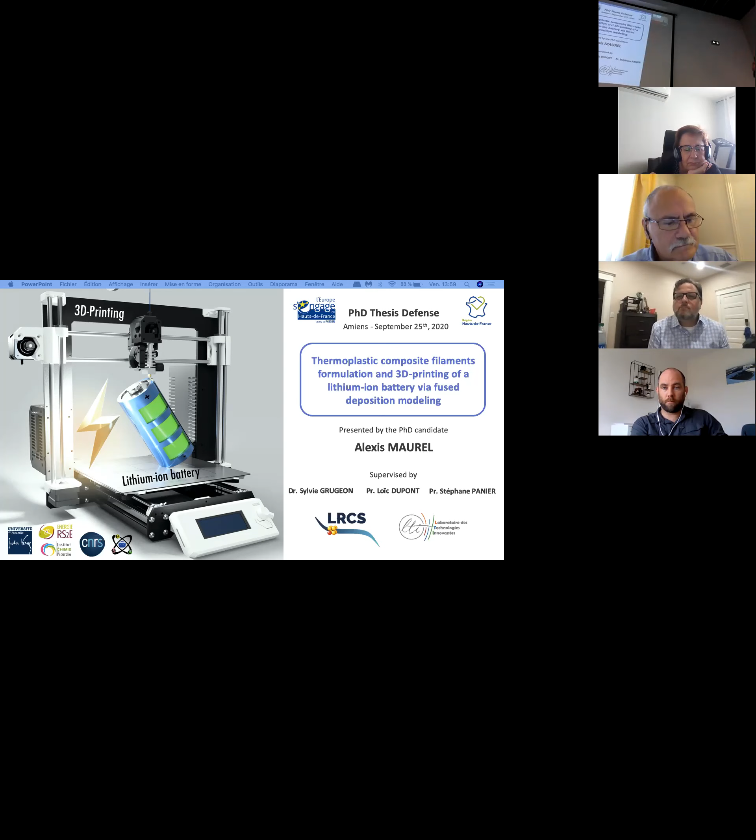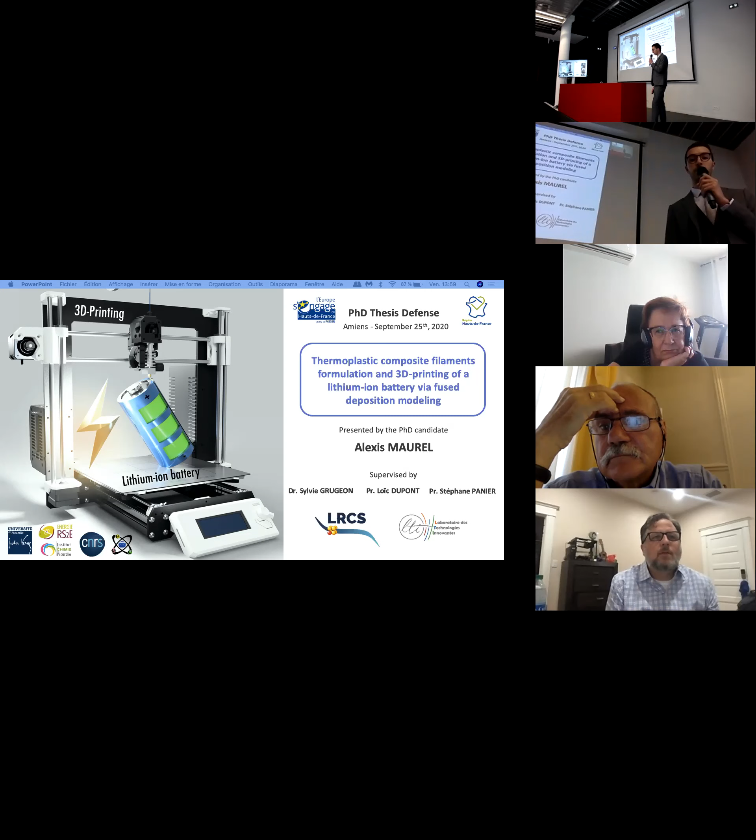Thank you very much. Good afternoon, everyone. It's a great honor for me to be here today to defend this PhD thesis. Today my talk is entitled 'Thermoplastic composite filaments formulation and 3D-printing of a lithium-ion battery via fused deposition modeling.' This PhD thesis was funded by FEDER and the region Hauts-de-France, and supervised by Sylvie Grugeon, Loïc Dupont from the Laboratoire Réactivité et Chimie des Solides, and Stéphane Panier from the Laboratoire des Technologies Innovantes.

Today's presentation is divided into 5 parts. First, after a brief reminder about the context of this thesis, I will go into more detail regarding the composite filament formulation as well as 3D printing of a complete lithium-ion battery. These two parts will focus only on liquid electrolyte technology. The 4th part will be about moving towards solid state technology for a lithium-ion battery. Then finally, I will conclude and give some perspectives.

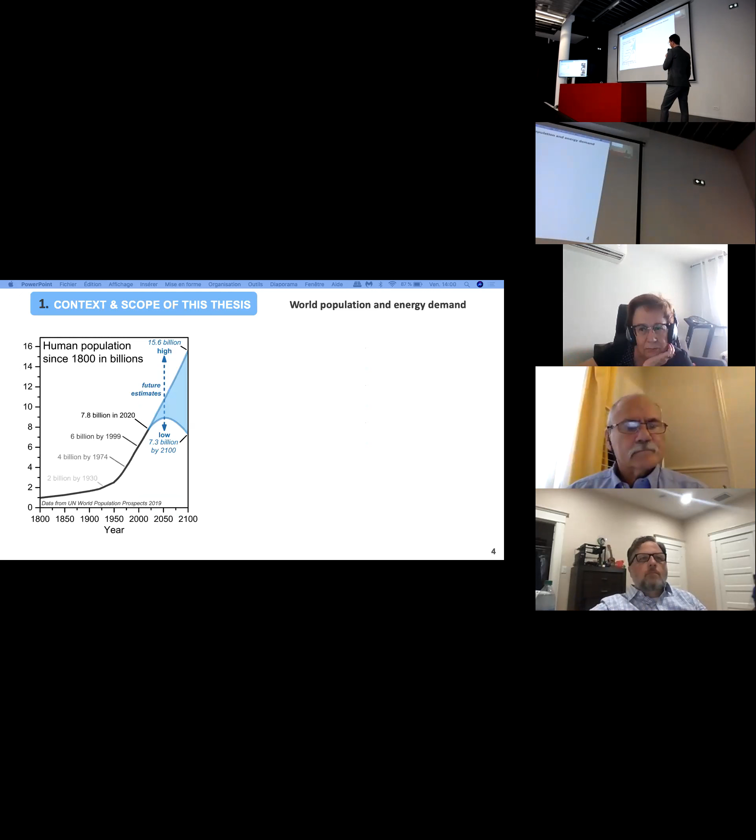First, about the background of this PhD thesis. Nowadays, in 2020, we are 7.8 billion people, and by the end of the century, as you can see here, this is going to stay the same or increase a lot. In parallel, if we look at world energy demand, you can see that the trend is increasing as well.

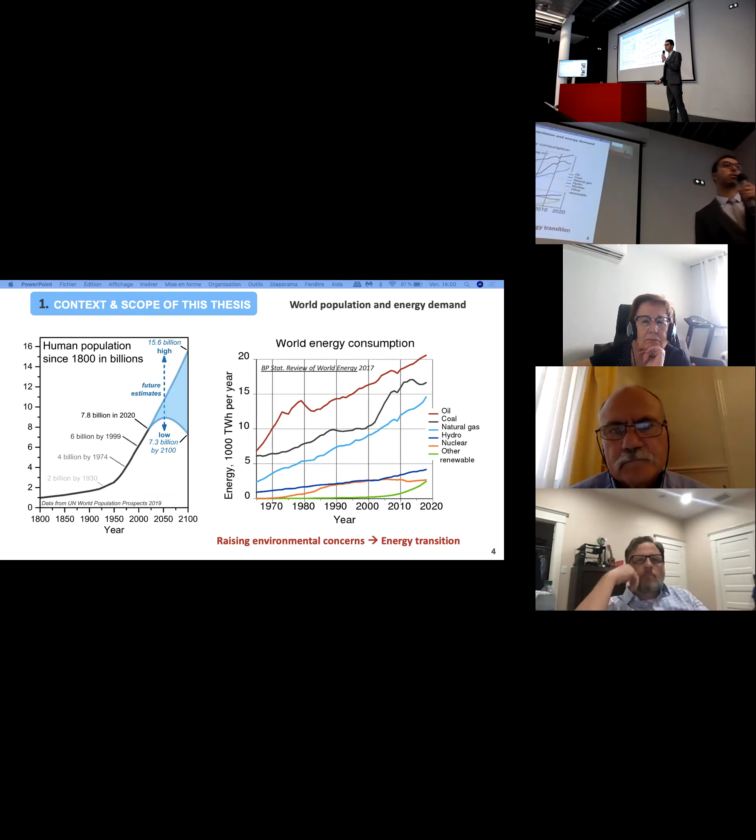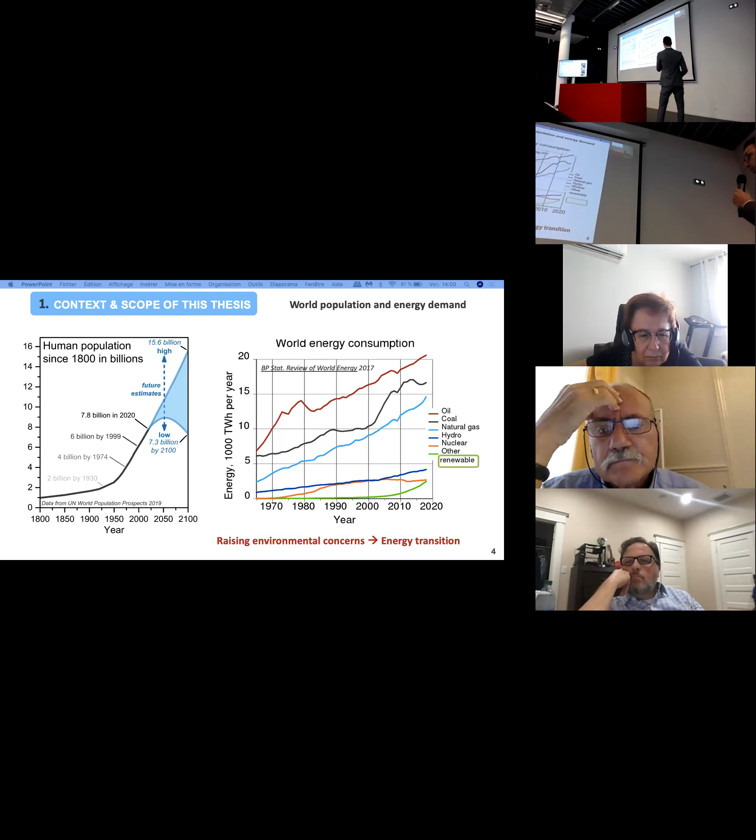During the last decades, we heard a lot in the news about rising environmental concerns due to fossil fuel energy sources. In recent decades, some governments tried to put new regulations in place to implement energy transition. Here you can see in the graphs that since 2000, the share of renewable energy sources has been increasing steadily.

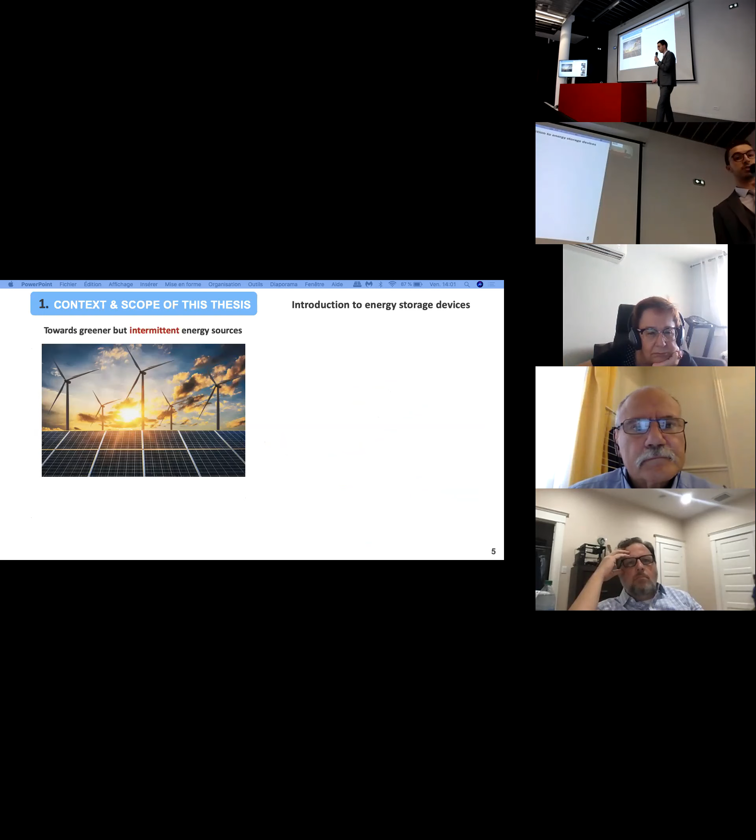The main issue with renewable energy sources such as photovoltaic or wind turbines is that both are intermittent energy sources. So energy storage devices are mandatory in parallel.

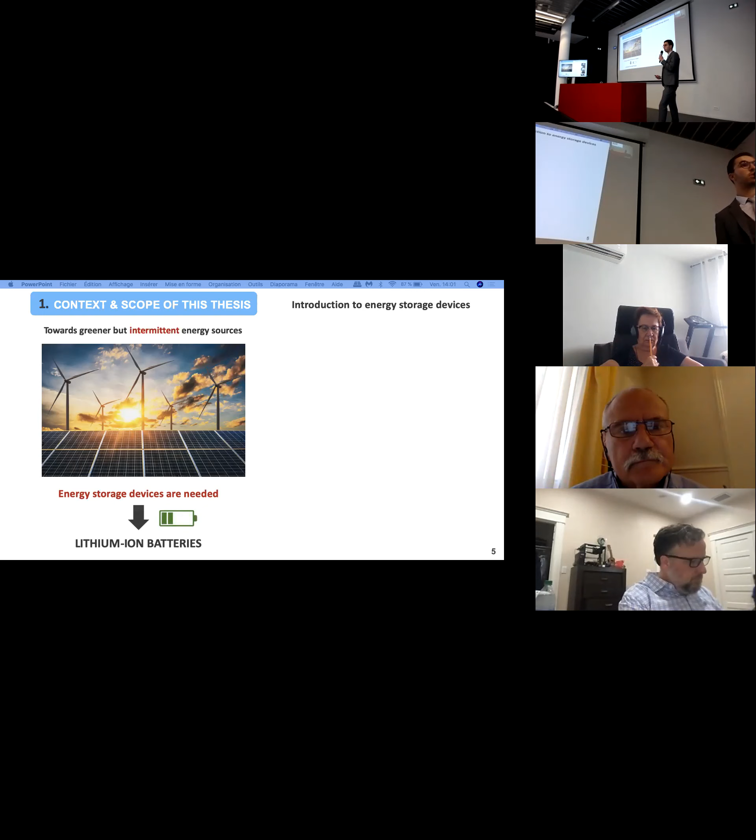Among these energy storage devices, lithium-ion batteries are widely used nowadays due to their good cyclability, long cycle life, as well as good energy density and power. These devices are now used in so many applications such as electronics, home appliances, and transport, that the entire field was rewarded last year when the Nobel Prize in Chemistry was awarded.

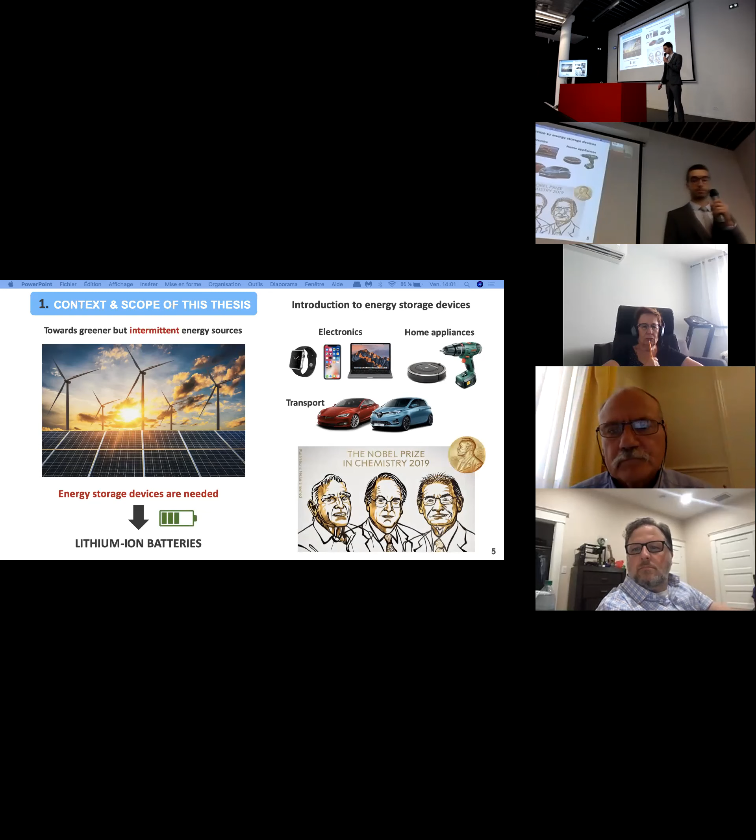If you look at a commercial lithium-ion battery, you will see it's based on liquid electrolyte technology, with different components: a positive electrode, a negative electrode, both separated by an electronically insulating separator membrane.

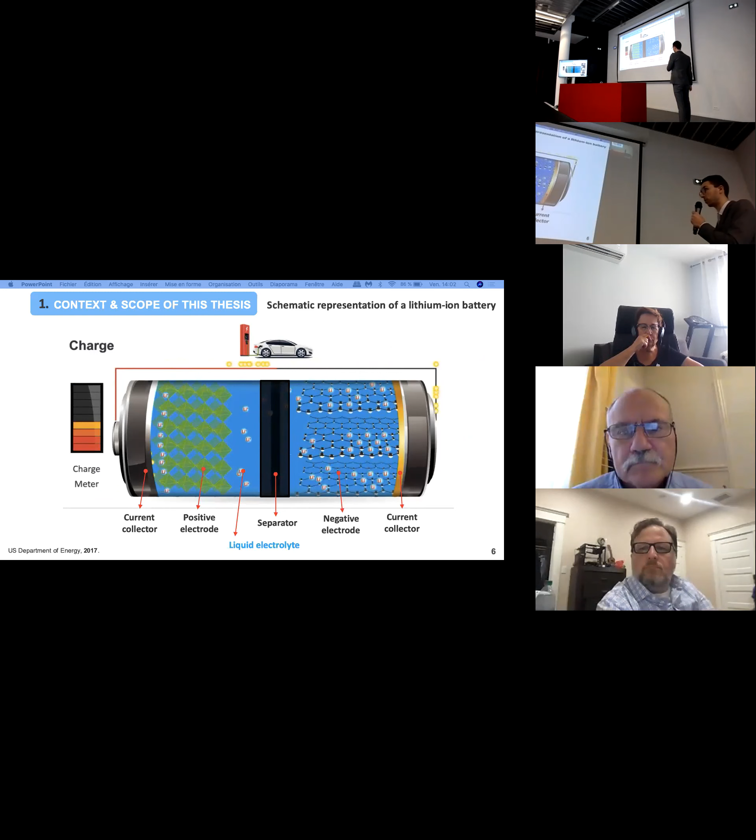During charge, the lithium ions move from the positive electrode towards the negative one, while the electrons move through the external circuit. During discharge, the exact reverse phenomenon takes place.

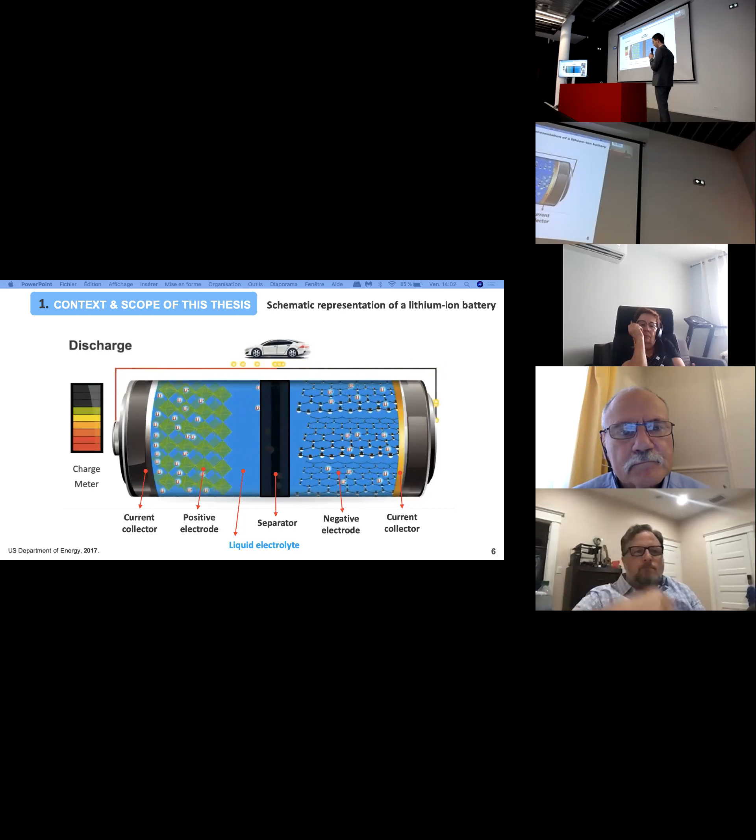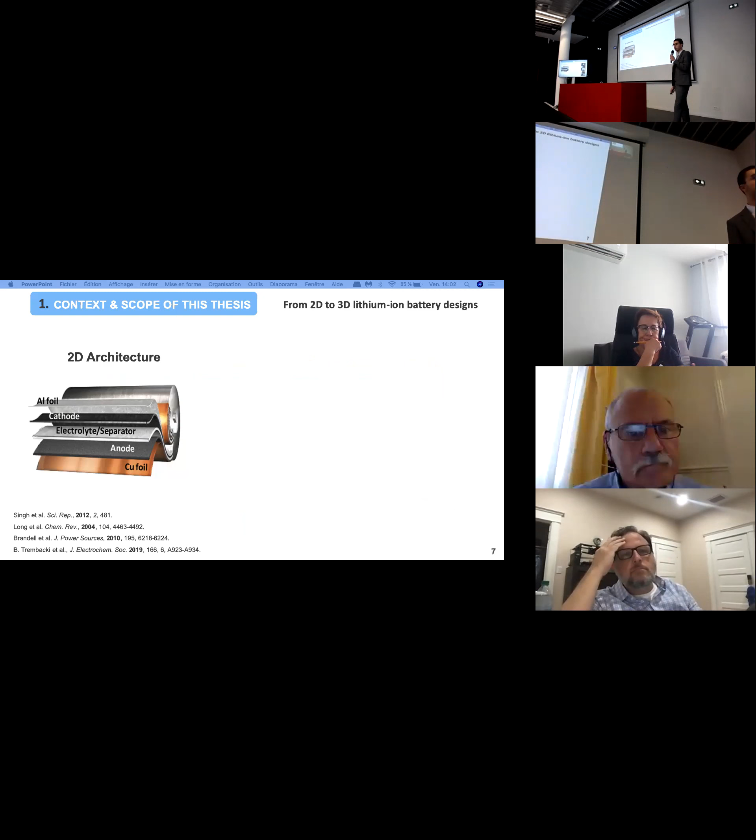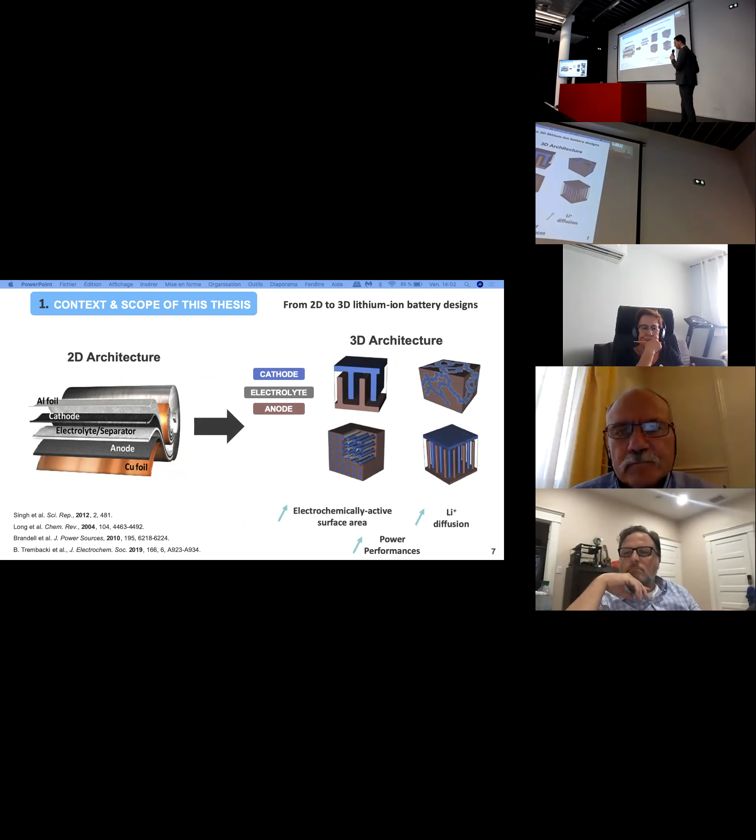It was reported in literature in the past that if you move from a two-dimensional architecture of the battery toward a three-dimensional architecture, you can improve considerably the power performances. This is due to the increased electrochemically active surface area, and also the lithium-ion diffusion is greatly improved thanks to this kind of architecture.

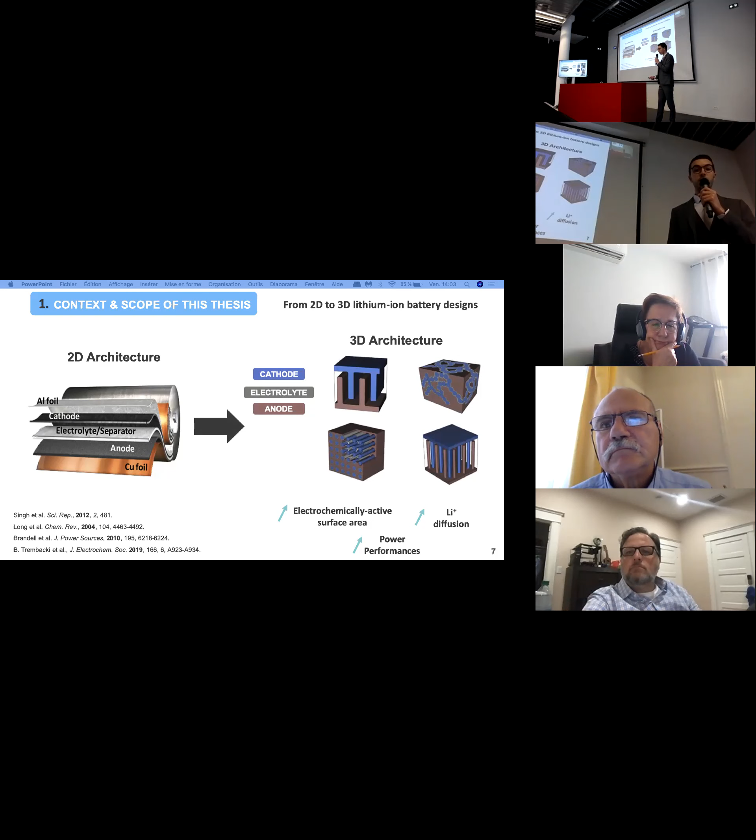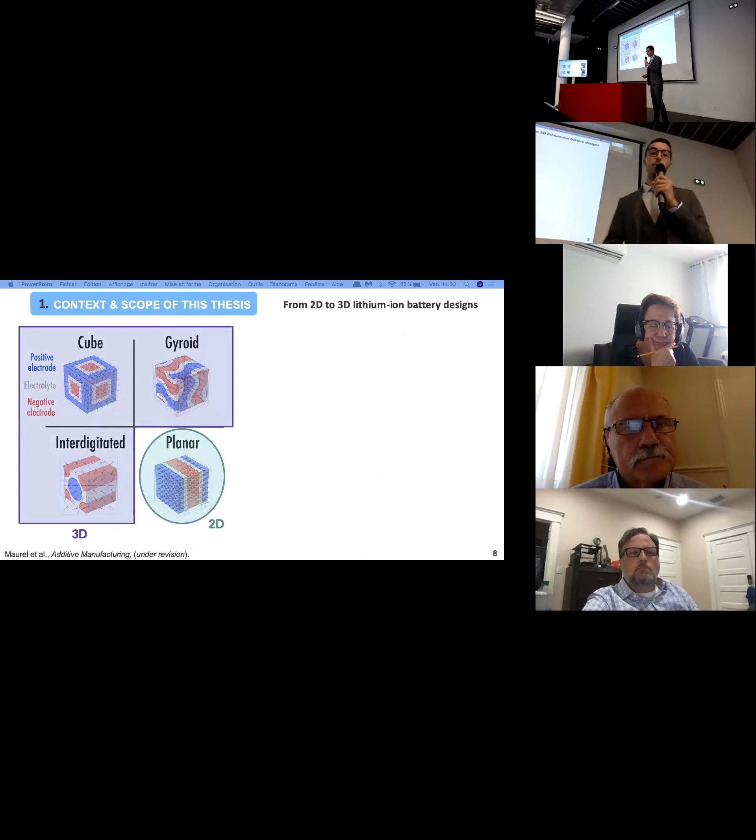This trend was confirmed during this PhD thesis. We did a modeling study here, comparing some two-dimensional architectures of the battery with three-dimensional architectures. Based on the results I'm going to show today, first of all, we saw the following.

You can see the lithium-ion diffusion path. In a planar two-dimensional electrode battery system, the lithium-ions are just moving in one dimension between the electrodes, doing a simple shuttle. While in three-dimensional architectures of the battery, such as the gyroid here, you can clearly see the lithium-ions move towards the whole space in three dimensions.

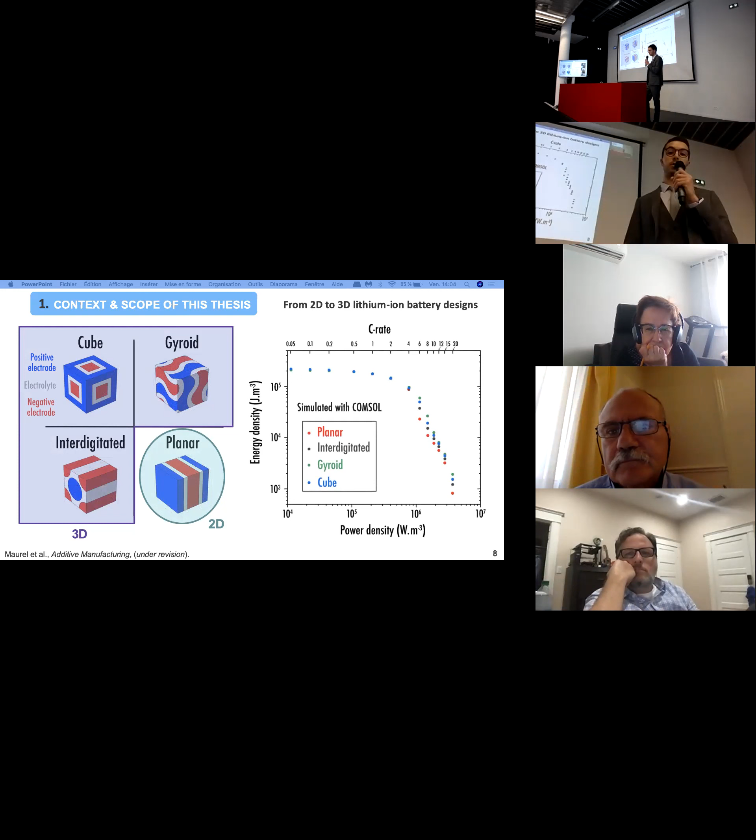Based on the results I'm presenting today from the thesis, we were able to model and simulate a Ragone plot, so energy density versus power density. Here, at high current density, for power applications, we were able to demonstrate that we have better performances for three-dimensional architectures compared to 2D ones.

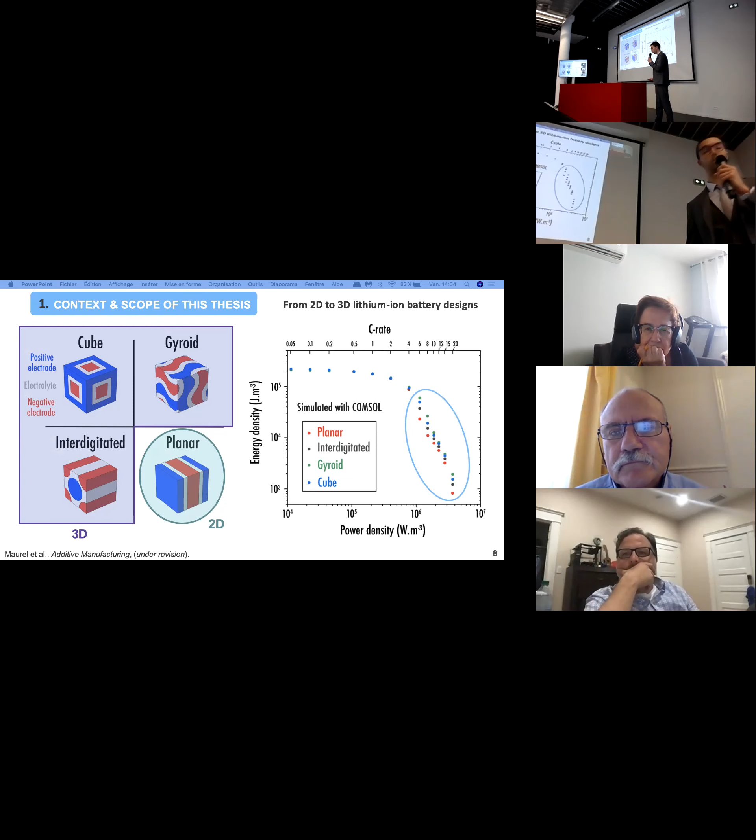Two-dimensional architectures are classical, but in order to reach three-dimensional architectures of lithium-ion batteries, such as the gyroid, these geometries are so innovative that you can only obtain them with very innovative technology, such as 3D printing.

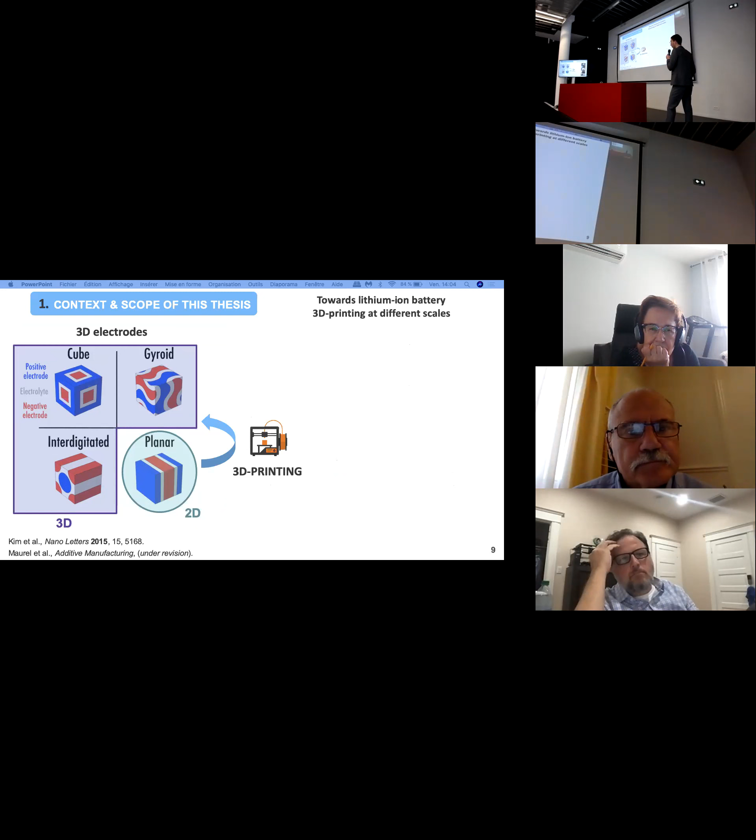There is another advantage of 3D printing: you can implement the battery into the object itself. Here is an example from literature by Kim et al., who used connected glasses. In commercial connected glasses, the lithium-ion battery is a huge block on one side of the frame. Thanks to 3D printing, we could imagine hiding this battery within the frame of the object, so the battery becomes the object.

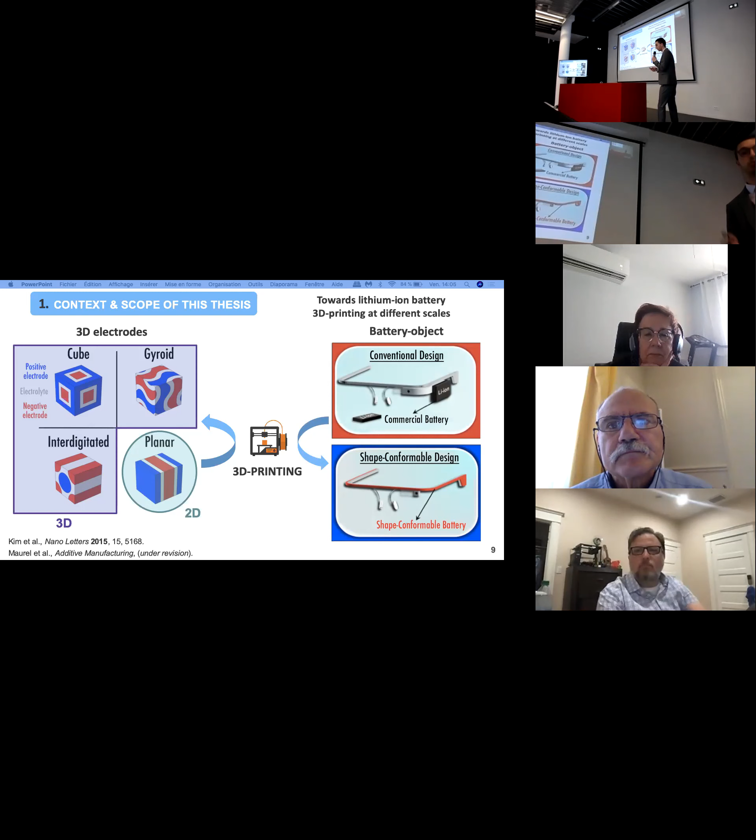But what is 3D printing? We also call it, scientifically speaking, additive manufacturing. It consists of consecutive layers of materials that are deposited on top of each other.

First, you need to draw the object you want to print using computer design software, and you obtain what we call an STL file, which consists of a mesh of dots, a mesh of triangles. Then this file is sent to a second software called a slicer, where you divide your object into horizontal slices. This is what we call a G-code file.

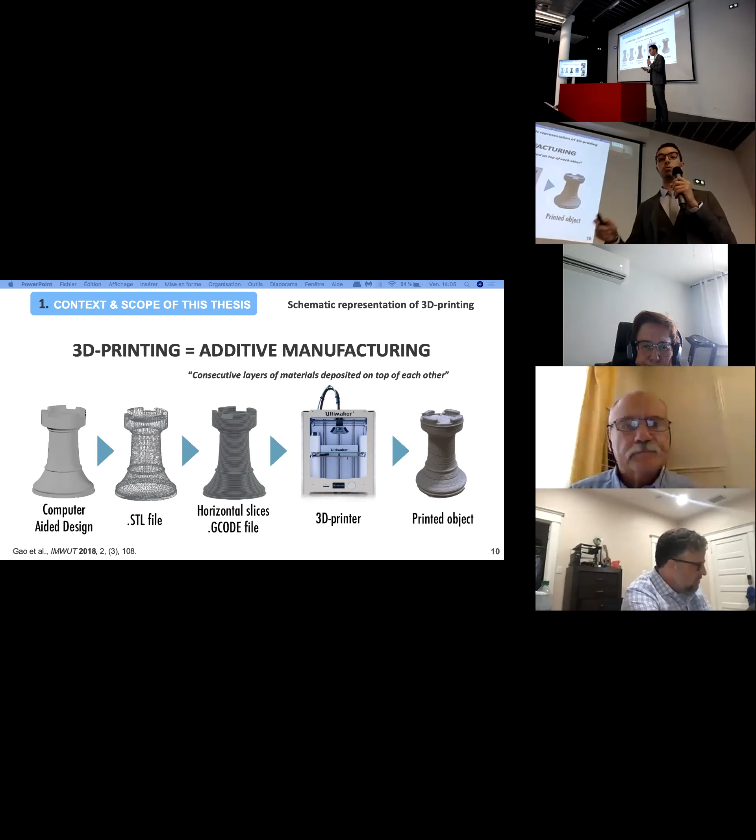Within this G-code file, you also implement printing parameters such as printing temperature, printing speed, etc. You send this G-code file to the 3D printer, and by pressing the play button, you're able to print your final object layer upon layer.

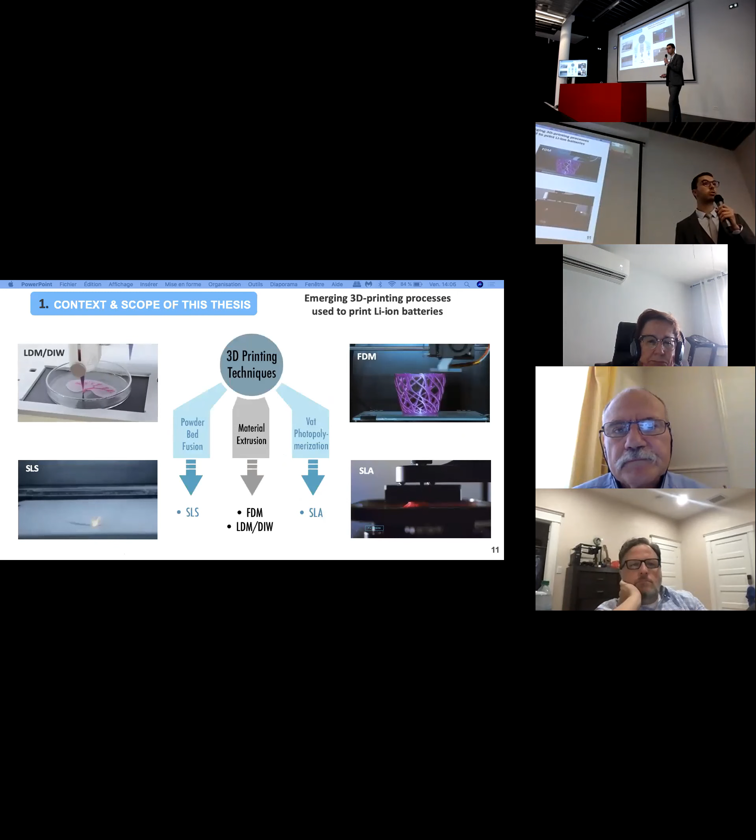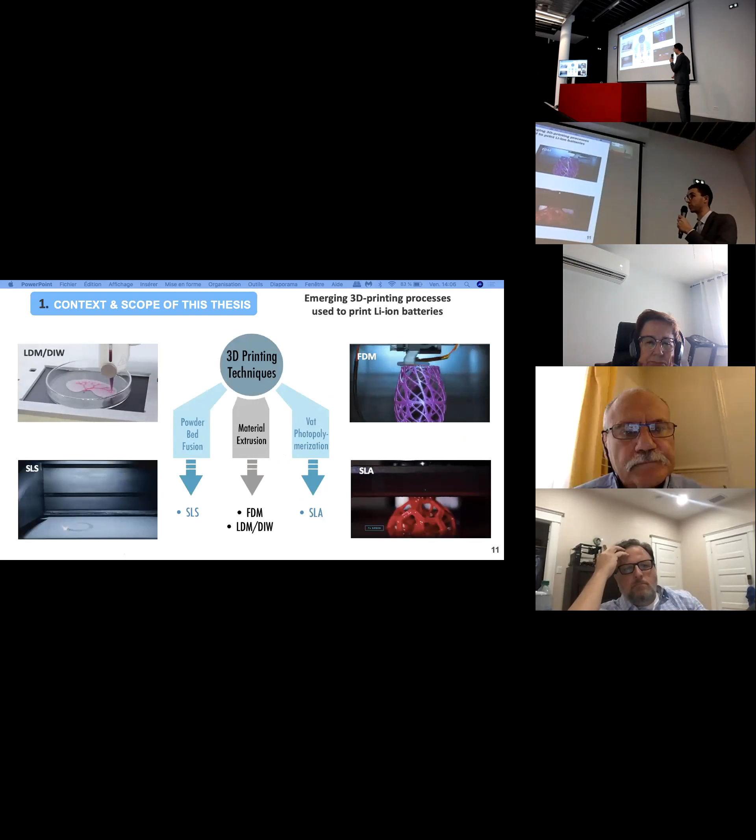Nowadays, the emerging 3D printing techniques used to print lithium-ion batteries are the following: liquid deposition modeling, also called direct ink writing, top left video; selective laser sintering, which uses powder; on top right, FDM, fused deposition modeling; and also stereolithography apparatus.

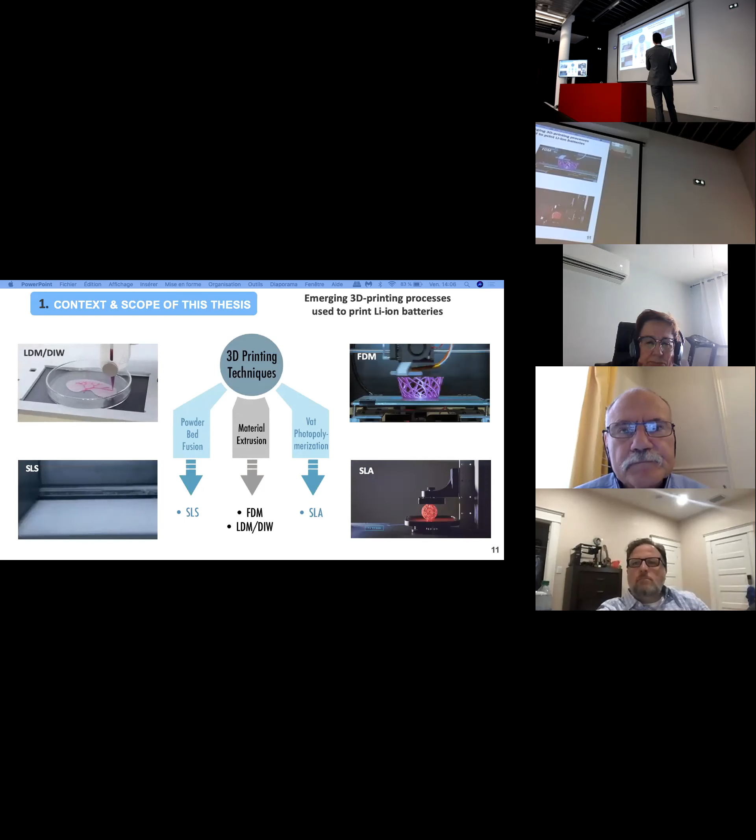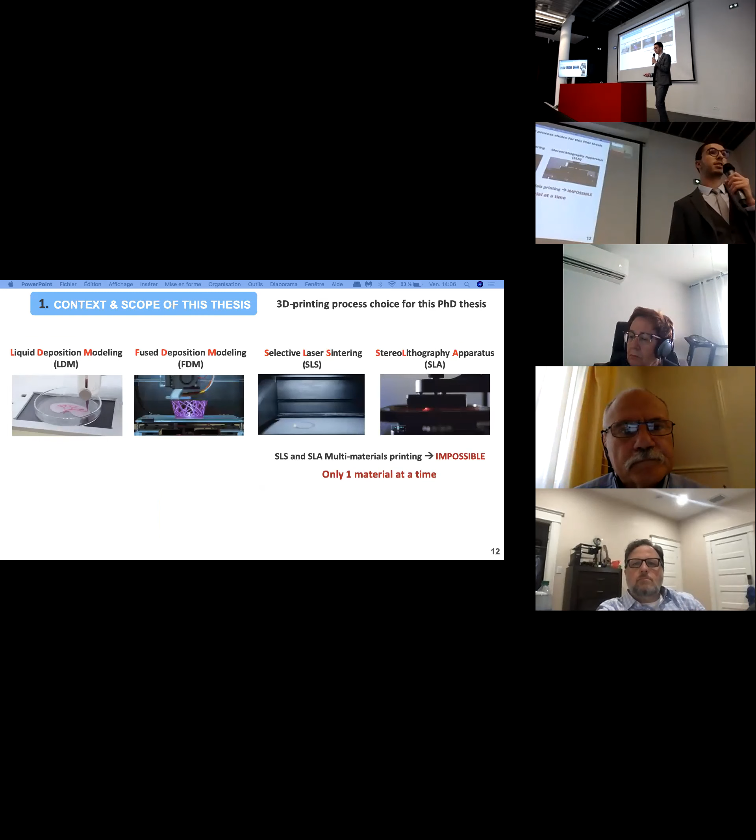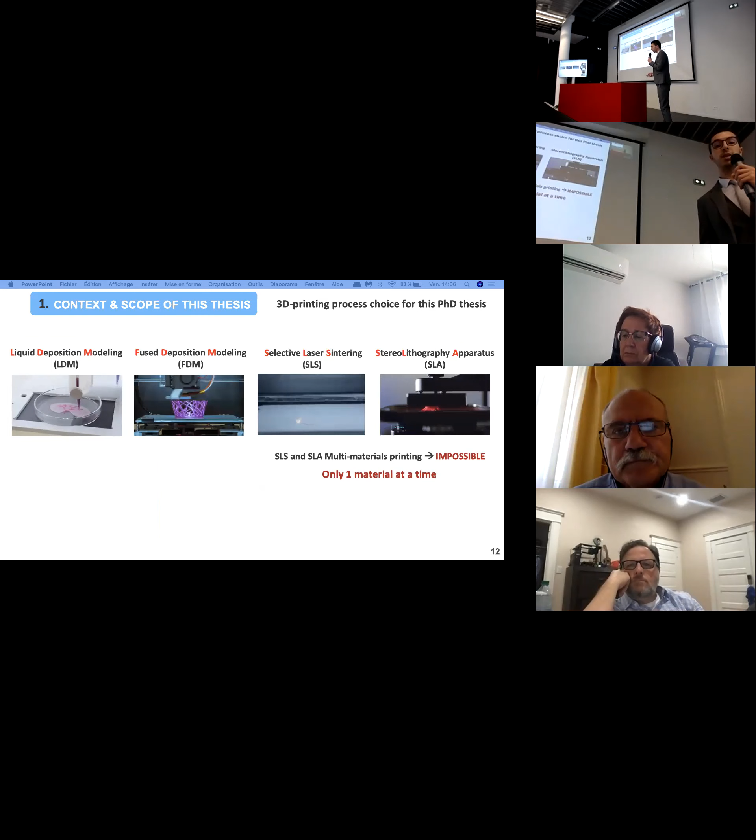Among these four techniques, the first step of this PhD thesis was to make the right choice, which process we were going to use to print lithium-ion batteries. Right from the beginning, we decided to exclude selective laser sintering and stereolithography apparatus, as with both techniques, unfortunately, you cannot print multi-material objects, meaning you can only print one material at a time.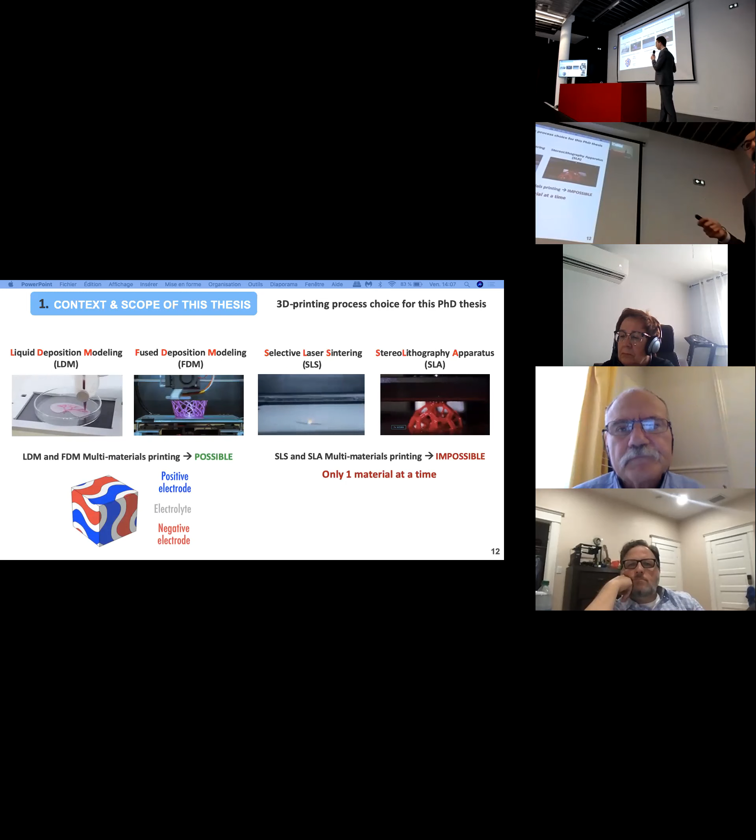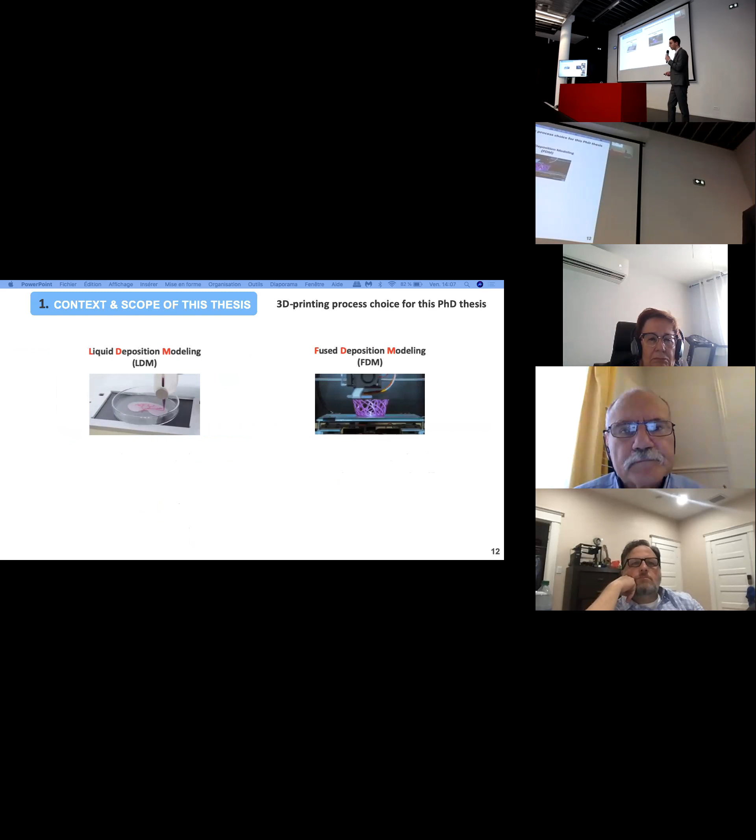So with both techniques, you cannot imagine printing such gyroid architecture for the lithium-ion battery, while with liquid deposition modeling and fused deposition modeling, you can, since multi-material printing options exist. So among these two techniques, LDM and FDM, we needed again to make a choice, and we took a look at the advantages and drawbacks of each technique.

So we decided to focus this PhD thesis on fused deposition modeling. Here you don't have that limitation and you don't have any post-processing. But you have another drawback: a filament formulation that is mandatory.

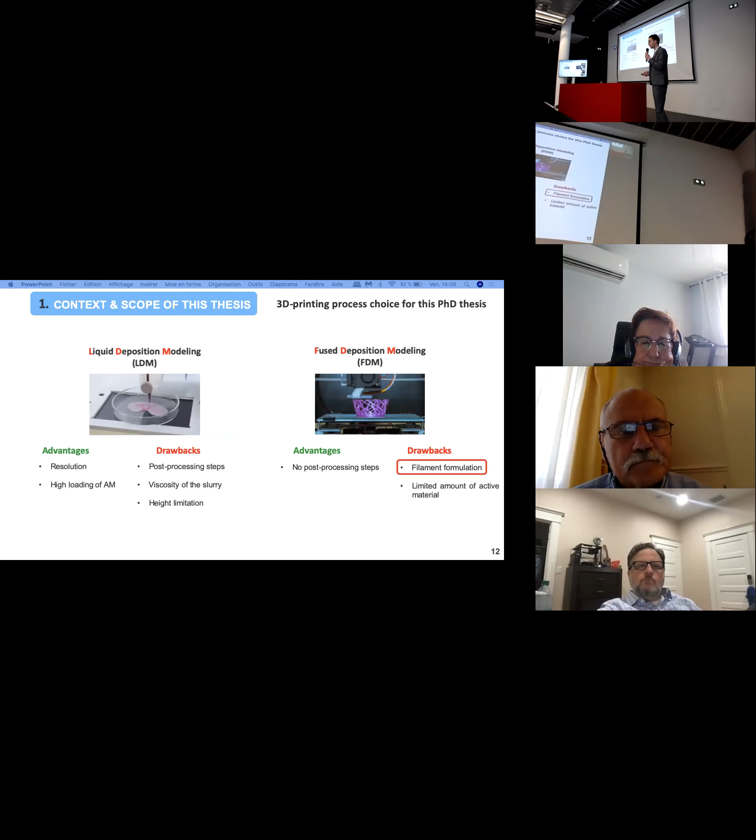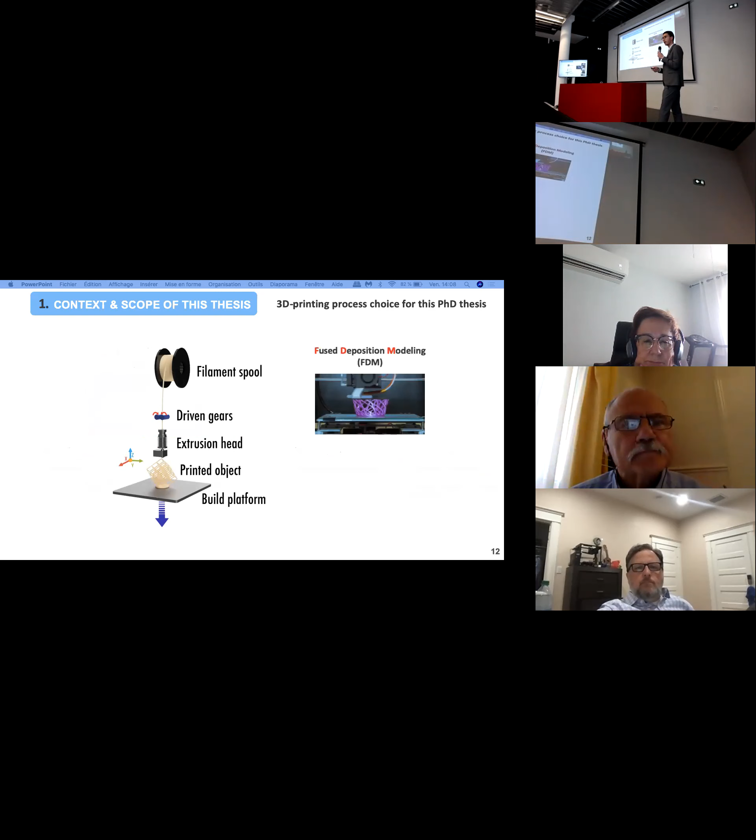If you take a look at the process itself, it uses thermoplastic filaments as the material source for the 3D printer. This filament is introduced within a heated nozzle, and by displacement of this nozzle into the three axes, X, Y, and Z, you are able to print wall objects layer after layer.

So these are the challenges we needed to address during this PhD thesis. The first part was focused mainly on composite filament formulation, corresponding to each component of a classical lithium-ion battery using liquid electrolytes.

In order to confer mechanical strength to the filaments, we decided to use polylactic acid, PLA, as polymer matrix. Why PLA? First, because it's a green polymer made from corn. Also, PLA is the most used polymer for FDM applications.

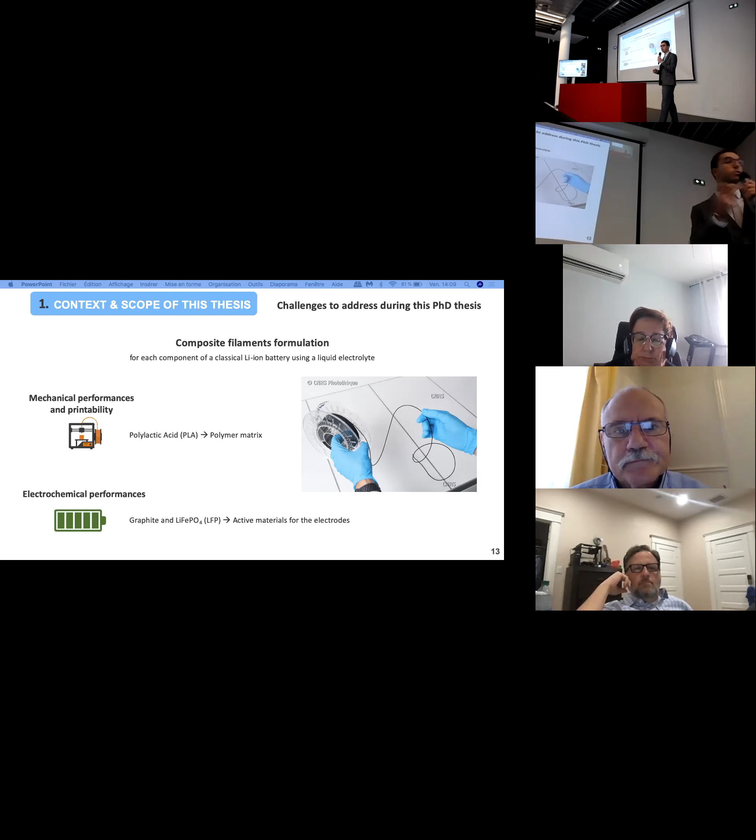Concerning electrochemical performance, we decided to choose classical active materials such as graphite and lithium iron phosphate as active material for, respectively, the negative and the positive electrodes.

Of course, it was a huge compromise between mechanical performance on one side and electrochemical performance on the other. If you have a filament with too high a loading of active material, you will clearly have printability issues. On the contrary, if you don't have enough active material within your filament, what you print will show poor electrochemical performance. So that was really a huge compromise.

Finally, once you develop these filaments, the main goal of this PhD thesis was to print the complete lithium-ion battery in one single step. That was the main goal.

So we started first with the composite filament formulation. First, we established an elaboration process. We decided to use a solvent to combine both the polymer matrix and the active materials. That was not ideal, but at least it was easy - more easy to have homogeneous samples at the laboratory scale.

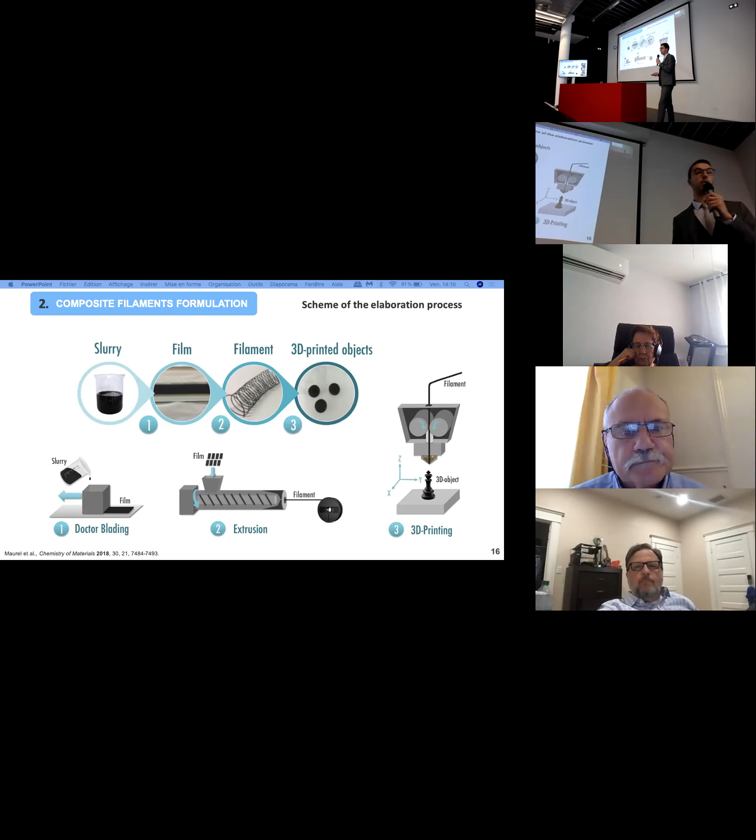After we have a homogeneous slurry, we perform tape casting, and after evaporation of the solvent, we obtain a classic film. This film is divided and cut into tiny pieces and used as a material source to feed the extruder. With this extruder, after extrusion, we obtain classical 1.75 millimeter filaments.

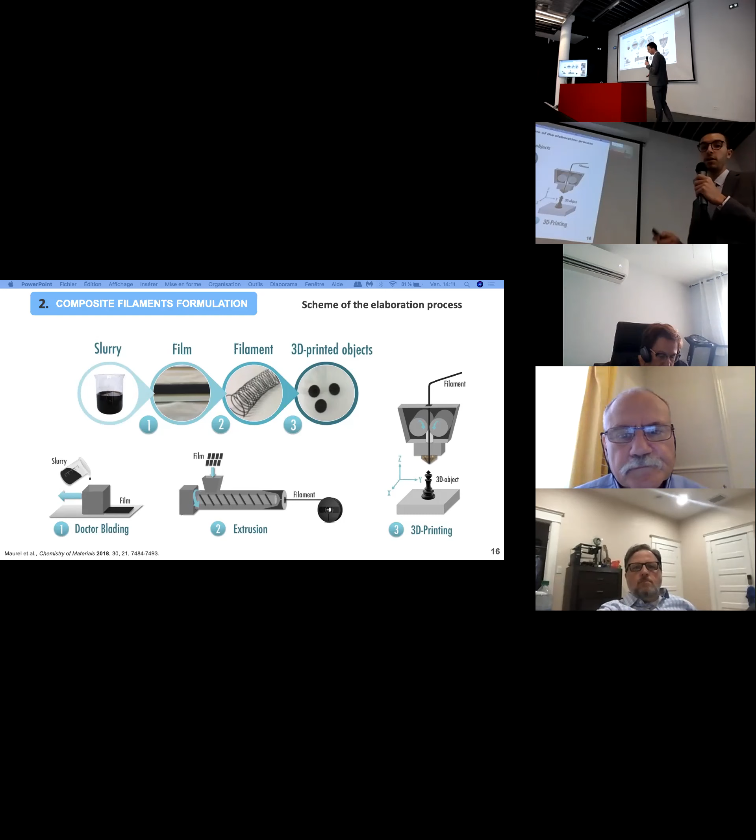This filament, finally, is used as material source for the 3D printer in order to print many objects, such as these 3D printed discs.

I would like to remind you that at the beginning of this thesis, we focused on filament formulation regarding liquid electrolyte technology. And first, we started by developing the filament for the negative electrode. Before starting to develop this filament, we took a look at what was available on the market.

We found a commercial filament that had 8% graphene and 92% PLA. Unfortunately, right from the beginning, we were thinking that 8% graphene would be maybe too low an amount of active material to confer good electrochemical performance. So instead of using this filament, we decided to create our own.

With this filament, we tried to load a huge amount of active material. As you can see, we tried to load up to 70% in weight percentage of graphite and only 30% PLA. Of course, the goal was to maximize the electrochemical performance while maintaining just enough mechanical strength to allow printability.

So here, that was a huge amount of active material we tried to implement. Let's focus on this main filament that we try to do. First step, of course, slurry.

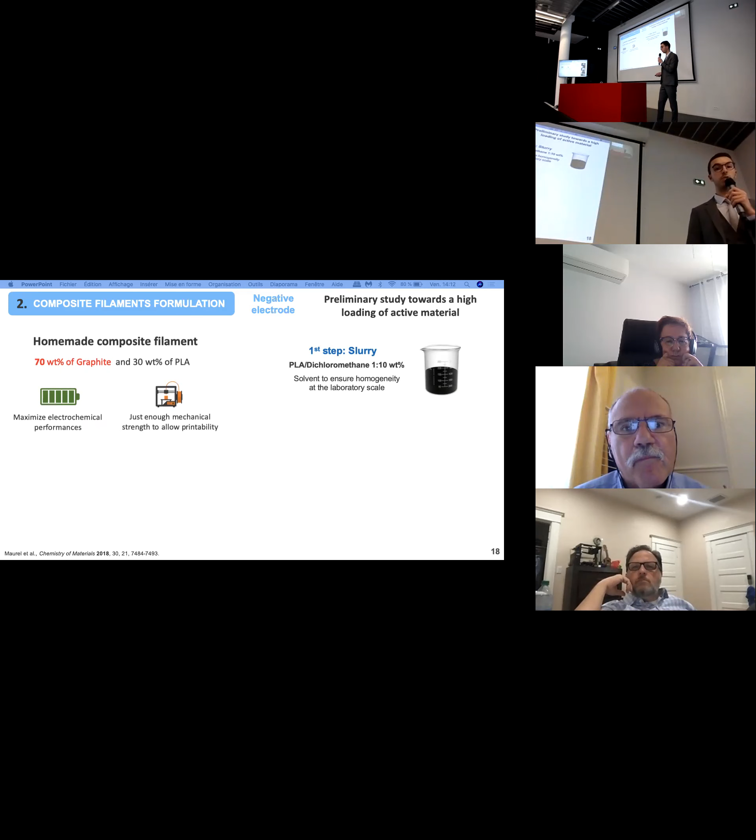We combine polymer matrix and graphite here in solvent. Here we use dichloromethane. Then we obtain a film, and this film we cut into tiny pieces in order to feed an extruder. Unfortunately, the resulting filaments, as you can see, were not printable at all.

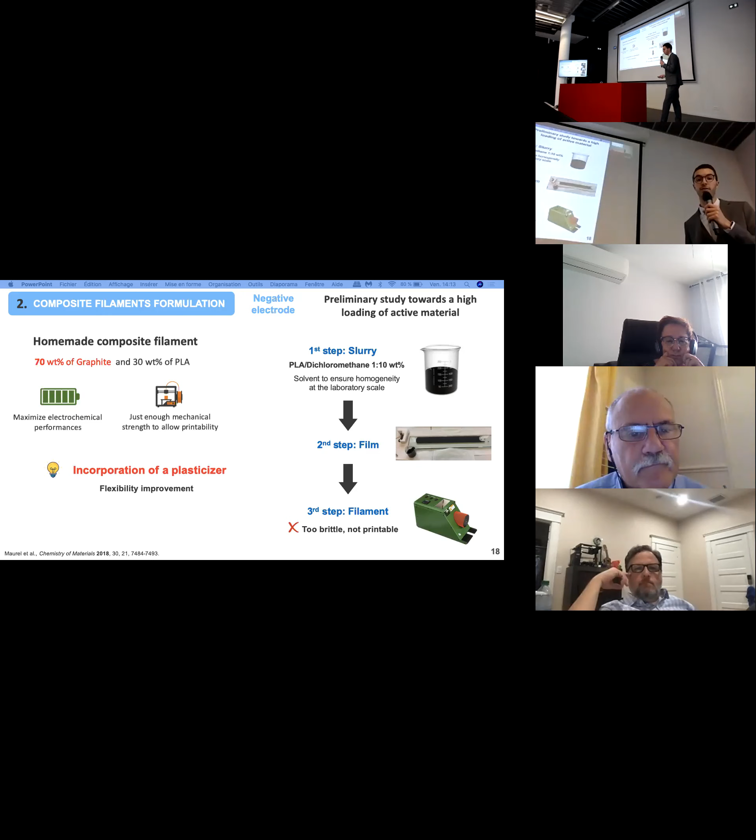It was too brittle, so we had an idea: why not try to incorporate a plasticizer in order to improve the flexibility of this filament and thus improve the printability. Starting from the exact same composition, 30% PLA and 70% graphite, we tested different kinds of plasticizer: polyethylene glycol dimethyl ether 500 and 2000, acetyl tributyl citrate, and propylene carbonate.

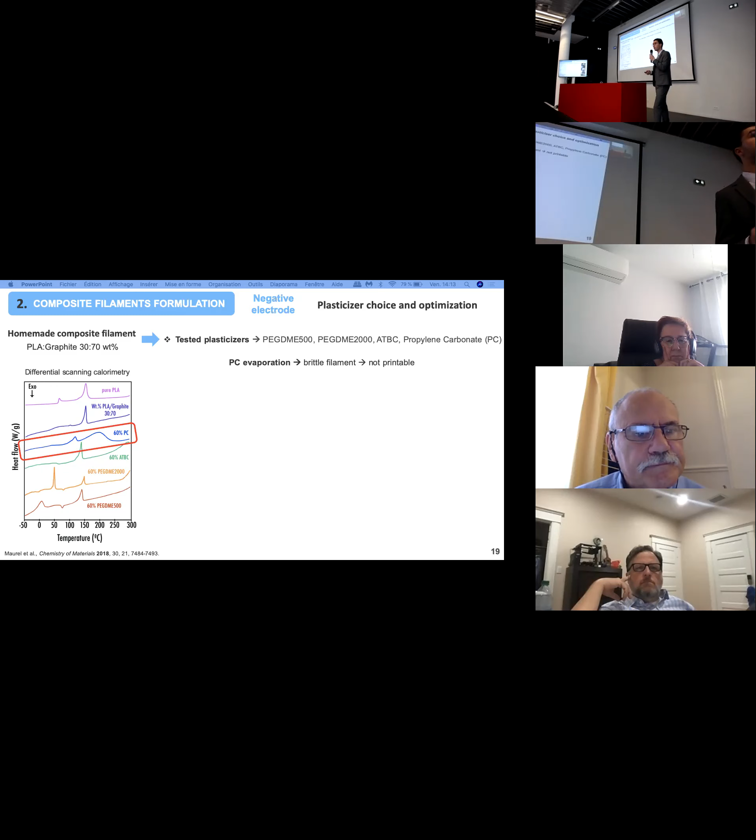When we tried to make a filament with propylene carbonate, as you can see by differential scanning calorimetry, we have a broad endothermal peak between 120 and 250 degrees, corresponding to the evaporation of this propylene carbonate. This matches our observation exactly: the filament we obtained was really brittle and so not printable. So here we ruled out propylene carbonate as a plasticizer.

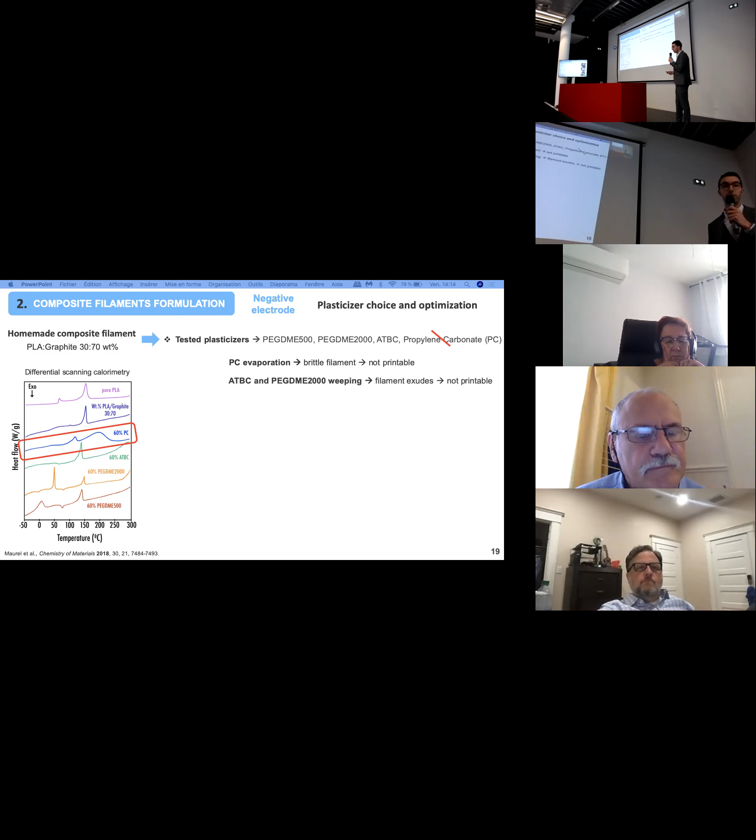Then we tried to make a filament with ATBC and PEG-DME 2000, but unfortunately after only a few days, the filament was really, really brittle, and we saw some tiny drops on top of these filaments. Both plasticizers were actually exiting the filament, meaning there was maybe an incompatibility between the plasticizer and the PLA polymer matrix. So again, we ruled out both plasticizers from this process.

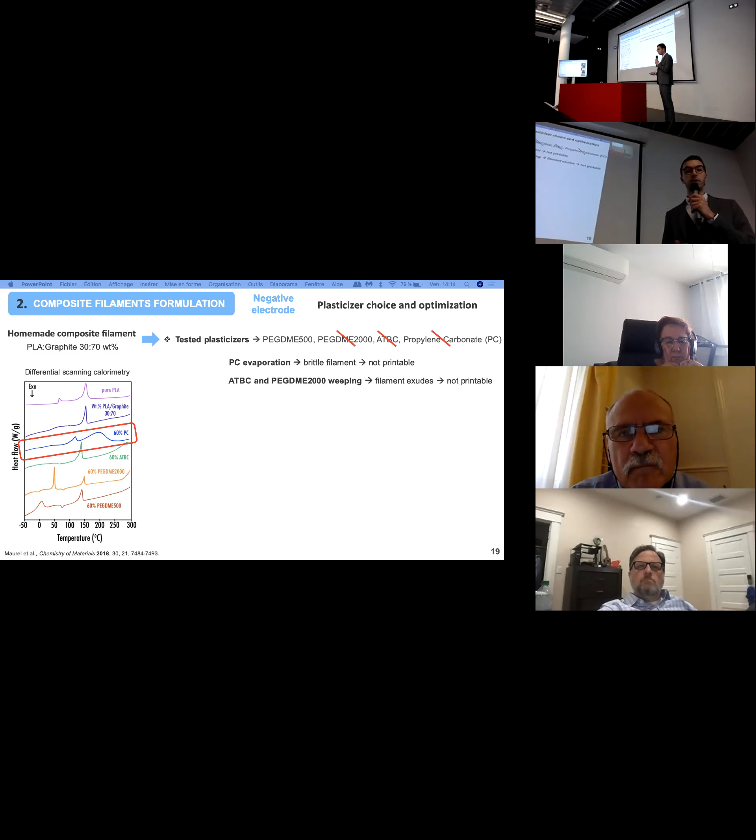Finally, with PEG-DME 500, we didn't have any issue. So we pursued our optimization and tried to optimize this plasticizer content.

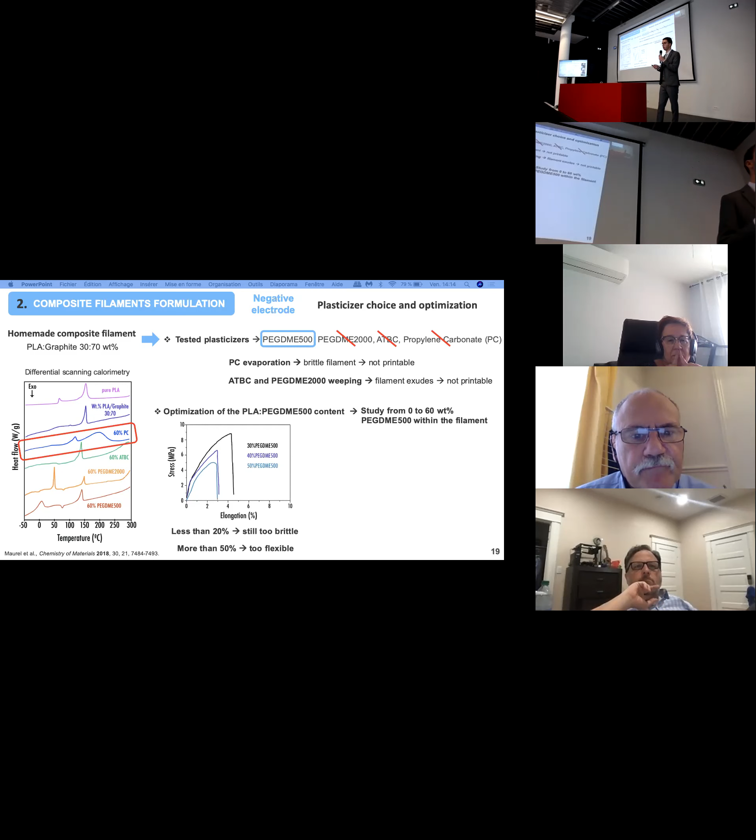We tried different compositions, doing a printability test as well as a tensile strength test in order to determine the Young's modulus. Through the printability test we saw that with less than 20% plasticizer, the filament was really brittle, while with more than 50% plasticizer, the filament was too flexible to be printed.

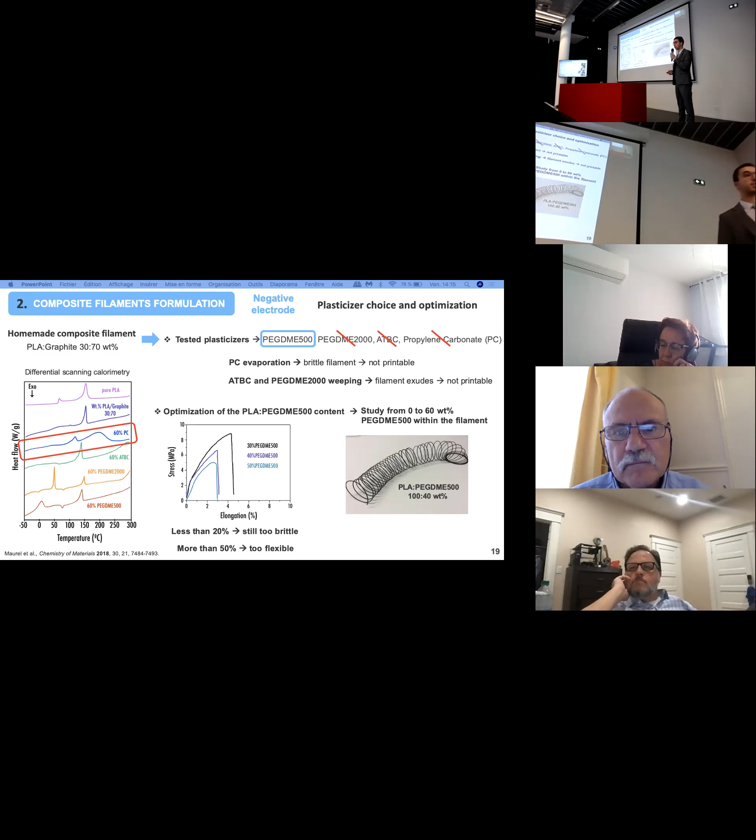Finally, thanks to the printability tests, we concluded that the filament containing 40% PEG-DME 500 was optimized. This corresponds to the ratio of 27% PLA, 62% graphite, and 11% of this plasticizer.

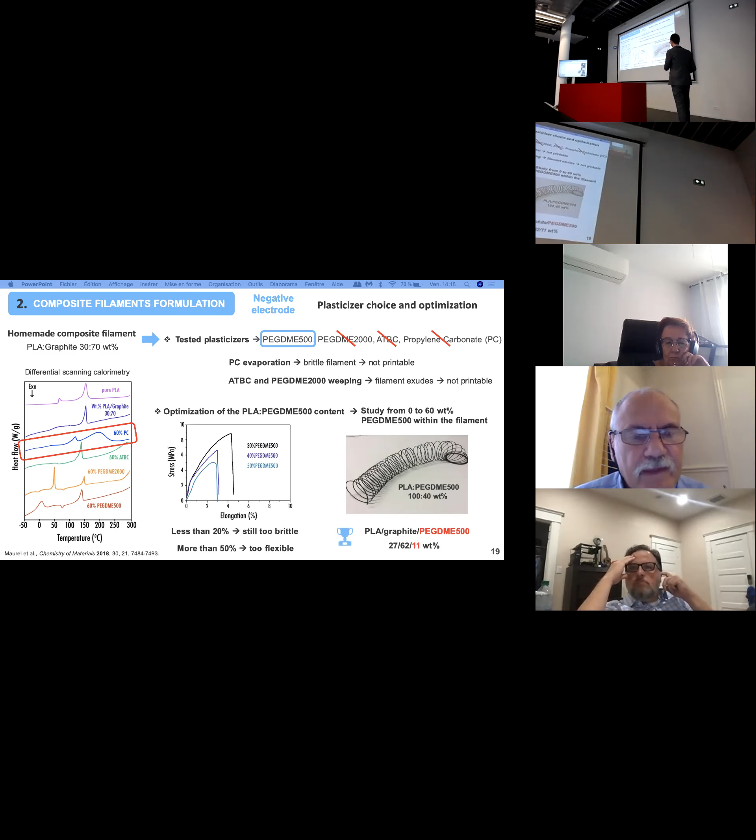Of course, it was necessary to take a look at the filament homogeneity, which we did using scanning electron microscopy. For the resulting optimized composition, you can clearly see that the graphite flakes are really well distributed into the PLA matrix.

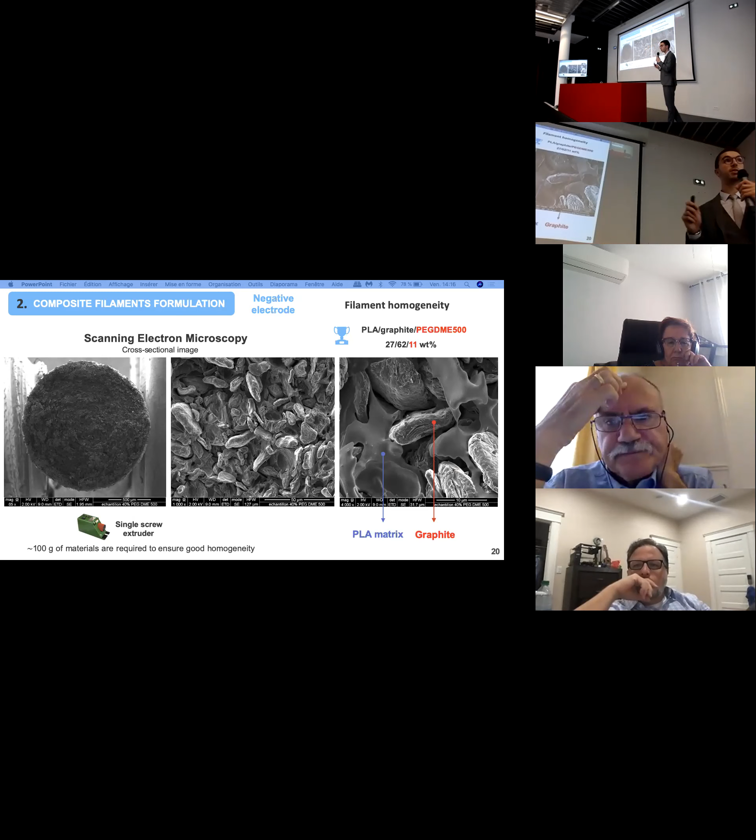Nonetheless, it's really worth mentioning that in order to have such a homogeneous sample, such a homogeneous filament, up to 100 grams of material was required to ensure good homogeneity, and this is particularly time consuming.

From this optimized composition regarding the plasticizer, we then pursued our optimization and tried to implement some conductive additives such as carbon black or carbon nanofiber in order to improve the electrical conductivity.

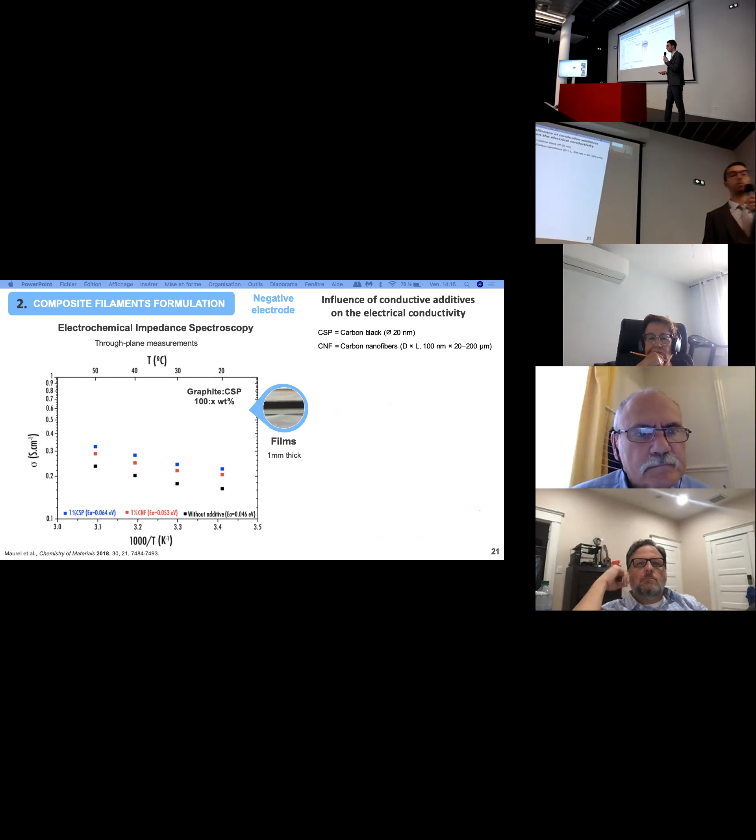Then we pursued our optimization. We tried adding some carbon nanofiber, and some carbon black, and finally reached our optimized value, which actually matches the optimization we did thanks to the electrochemical characterization, which I will discuss later.

Here is the optimized ratio of the filament: 33% PLA, 49% graphite, 5% carbon black, and 13% PEG-DME 500.

If you take a look at the TEM image, you can clearly see that the carbon black is really well distributed within the PLA matrix.

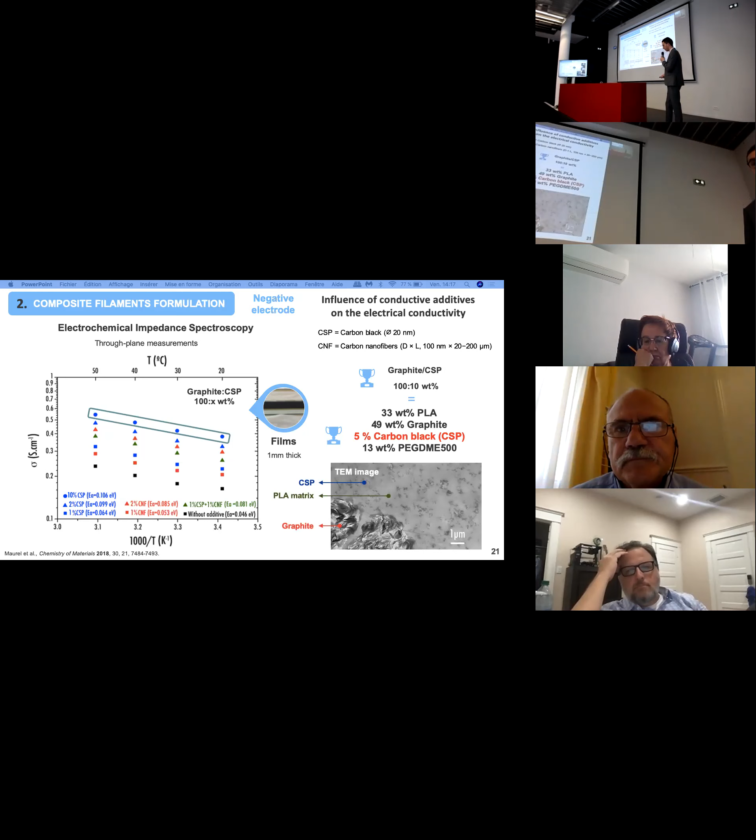Again, as I previously mentioned, we pursued electrochemical characterization on both films and 3D printed discs.

We have a small issue here.

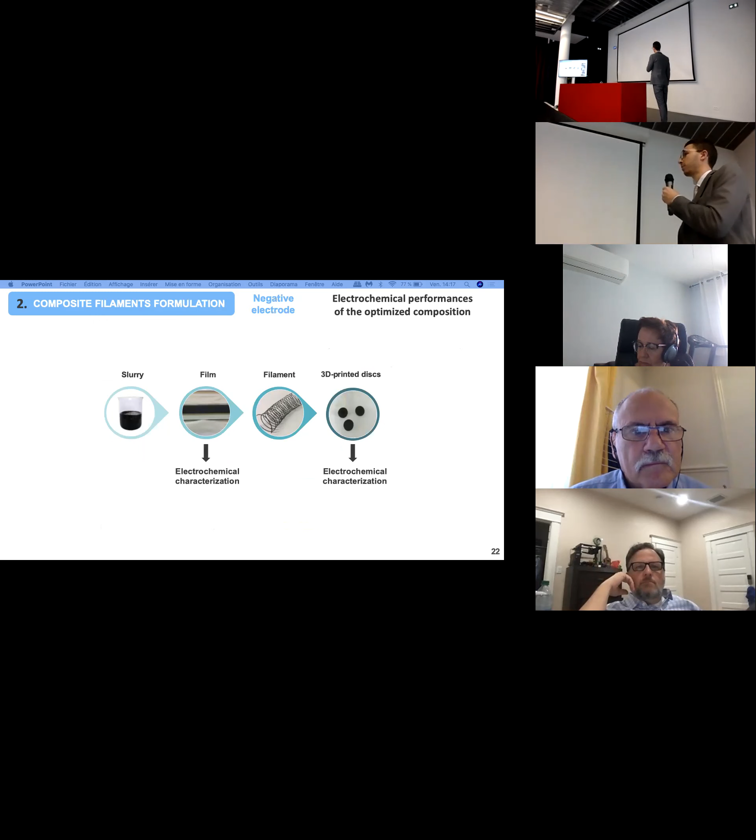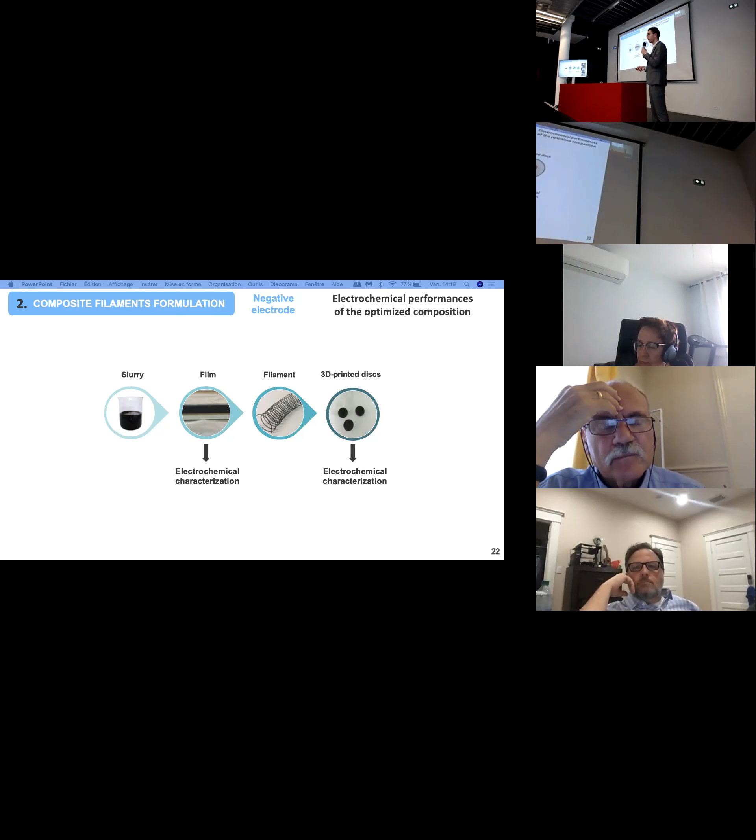So we did electrochemical characterization on both films and 3D printed discs. We cut some discs from the film and inserted them into a classical Swagelok. Here we got our working electrode, and we tested that versus lithium metal. This is really classical, and from this we were able to check the electrochemical performances.

So for the films, as you can see, with the optimized value, we were almost reaching the theoretical capacity of graphite, the active material, which is about 372 milliampere hours per gram.

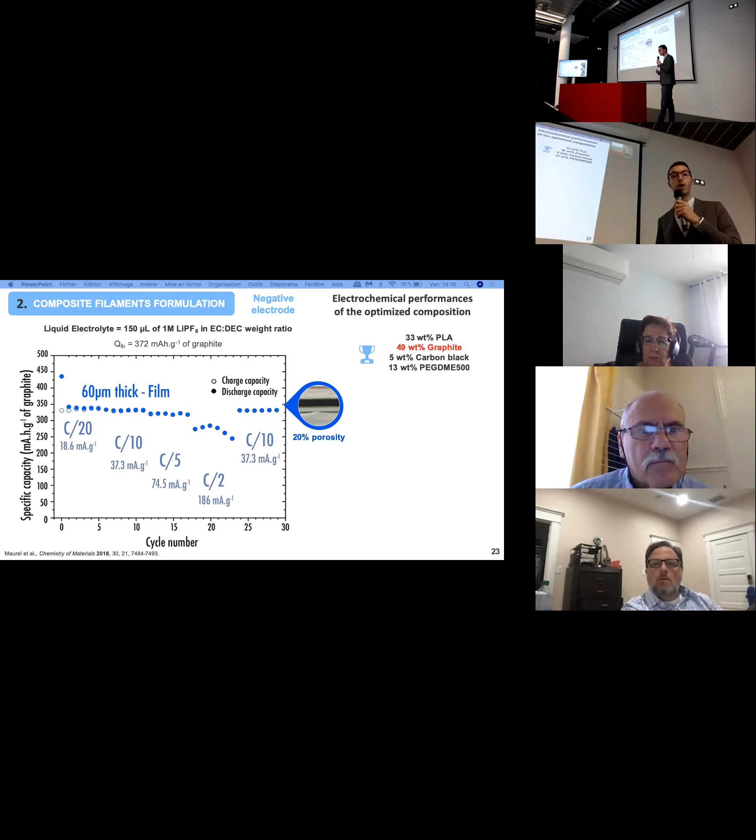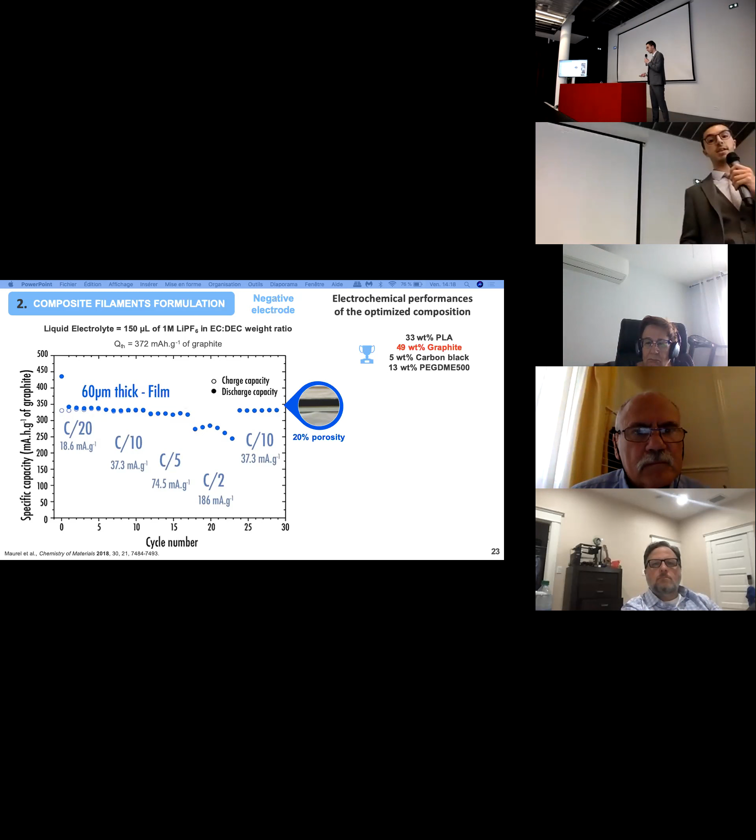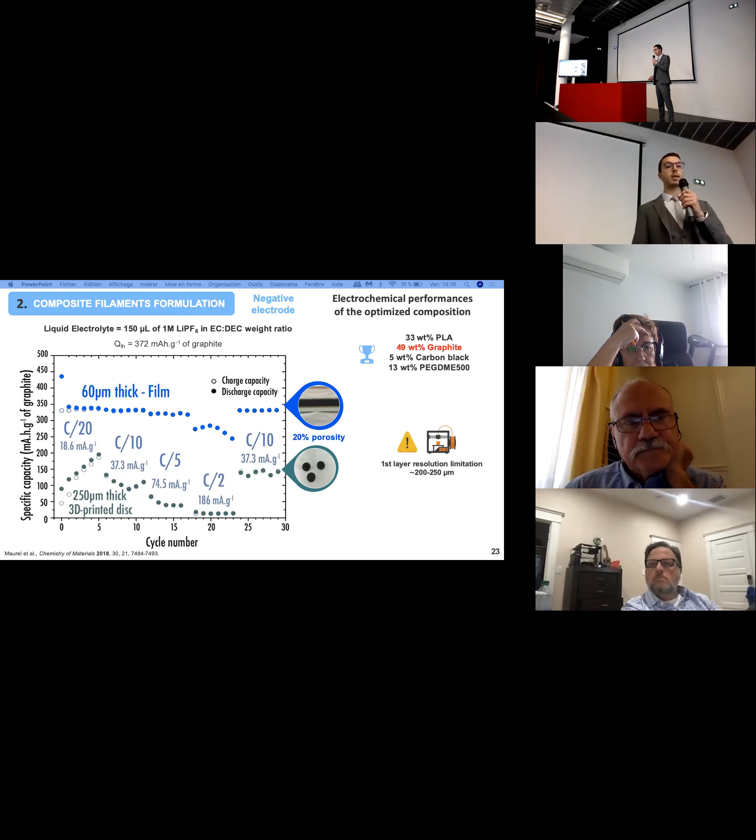Unfortunately, this gap is mainly, and only, due to the difference in thickness. With fused deposition modeling, you are subjected to a first layer resolution limitation. The first layer, when you print, will always be thicker, about 200 to 250 microns, while the upper layers can go down to 50 microns. So this gap is only due to this first layer resolution limitation.

Finally, you may think that these electrochemical performances we got are quite low, and you are right. In comparison with commercial lithium-ion, of course they are quite low. Nonetheless, I wanted to share this with you.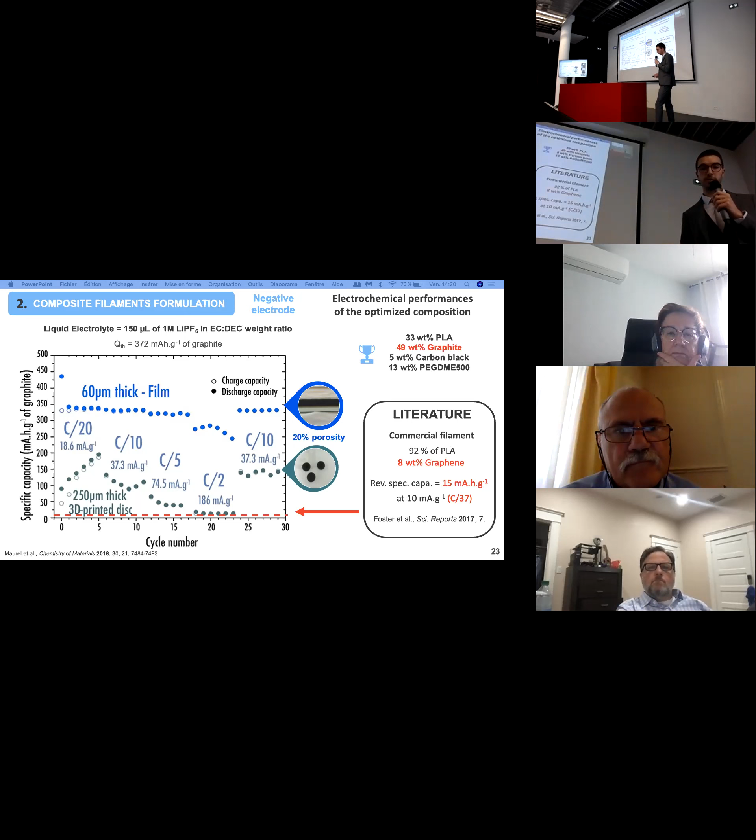I just mentioned that about the negative electrode, but we did exactly the same work focused on the positive electrode. I will not go into details right now because it's exactly the same, but I just wanted to show you the electrochemical performances.

Here again, with the optimized composition, we were almost reaching the theoretical capacity of lithium iron phosphate in this case, which is about 170 milliampere hours per gram.

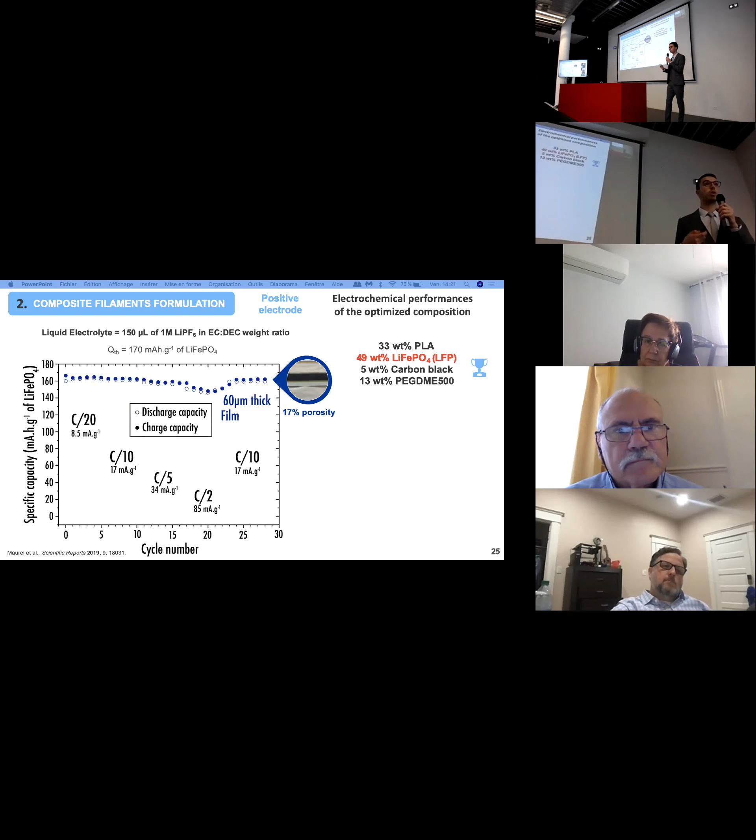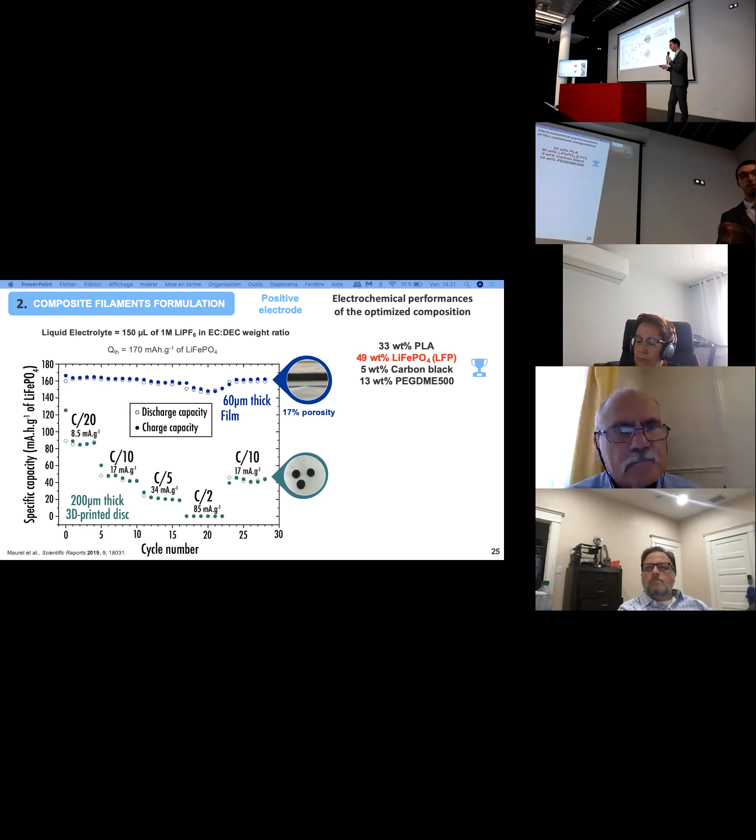So we decided with this composition to produce 1.75mm classical filaments and to print some 3D discs. These 3D printed discs, you can see again, have a huge gap between the films and the values obtained for the 3D printed disc, and again this is due to the first layer resolution limitation.

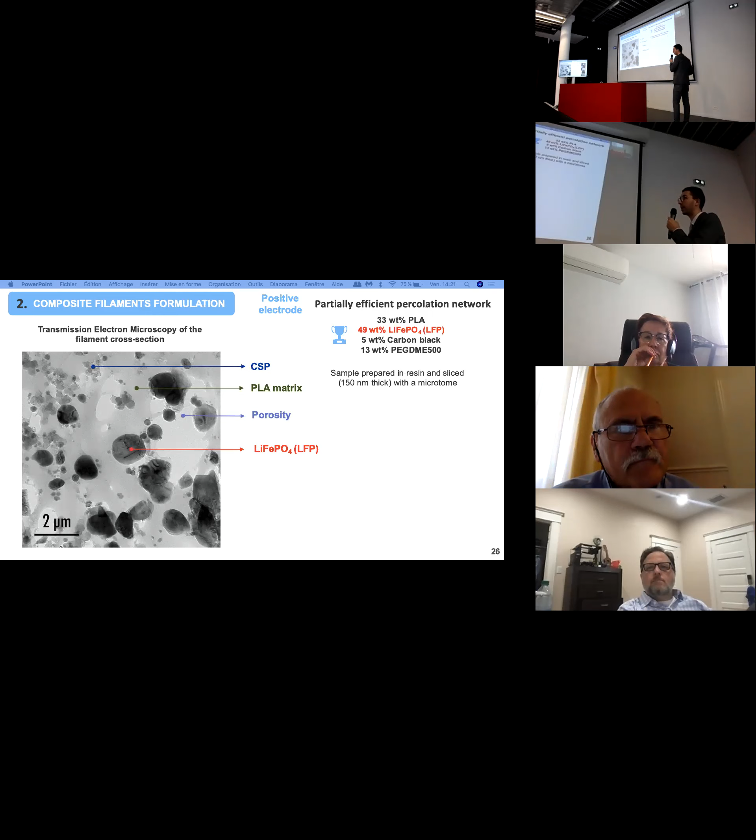Then it was needed to take a look by transmission electron microscopy to see a little bit the percolation network. And here, unfortunately, we can clearly see that LFP particles are not really well connected to the percolation network, so there is clearly still room for improvement.

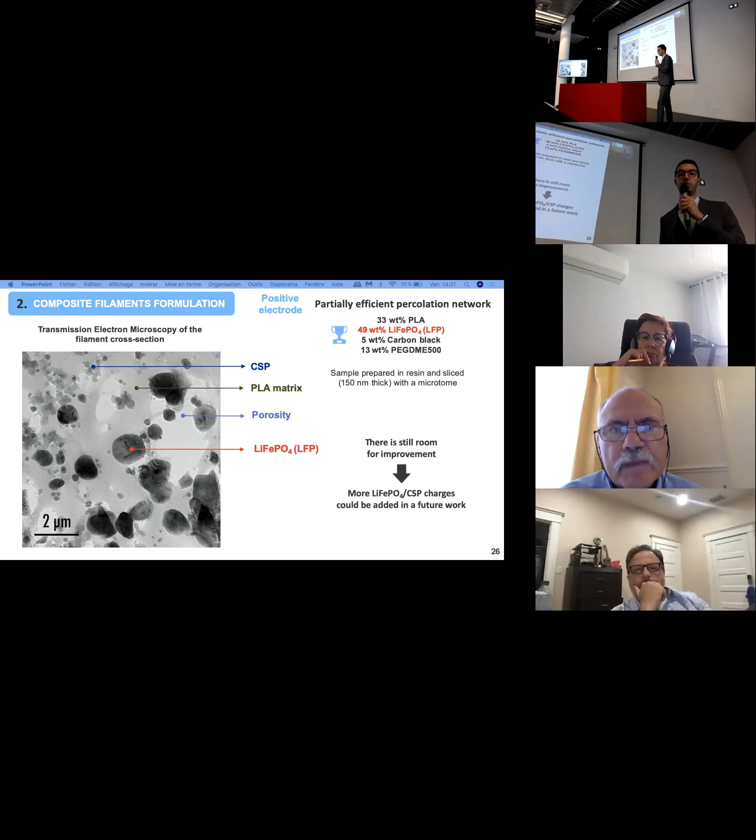In the future, we can imagine adding more conductive charges and also more LFP to this particular composition. So now I talked about the negative electrode, and I talked about the positive one as well.

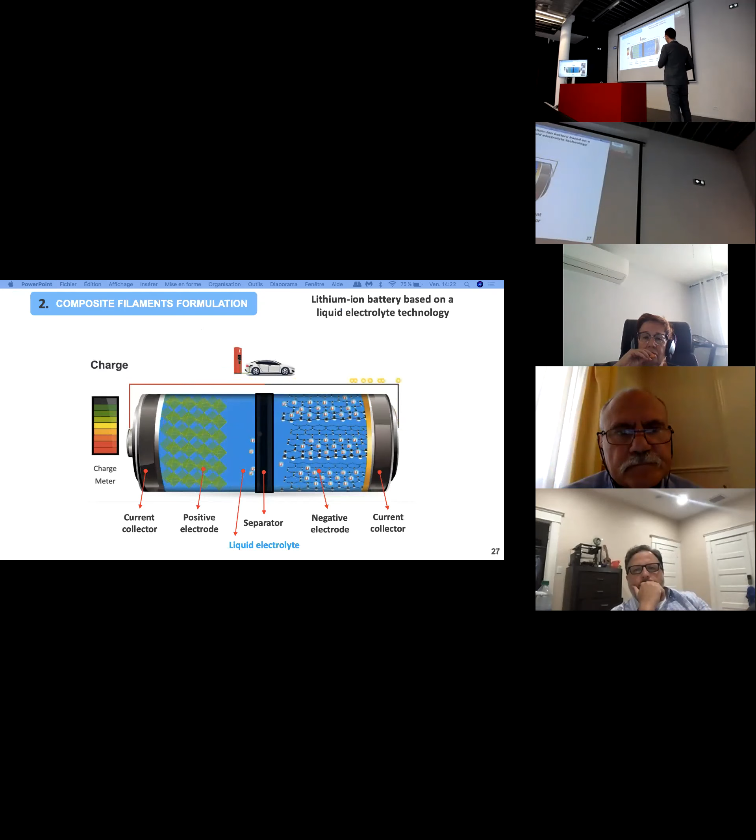We also tried to develop a filament for the separator. Starting from a pure PLA filament, we tried to increase a little bit the liquid electrolyte impregnation. We tried implementing silica particles into the filament, and by increasing the silica content, we saw that the swelling was decreasing, which makes sense because the polymer matrix is the one prone to being solvated with the liquid electrolyte.

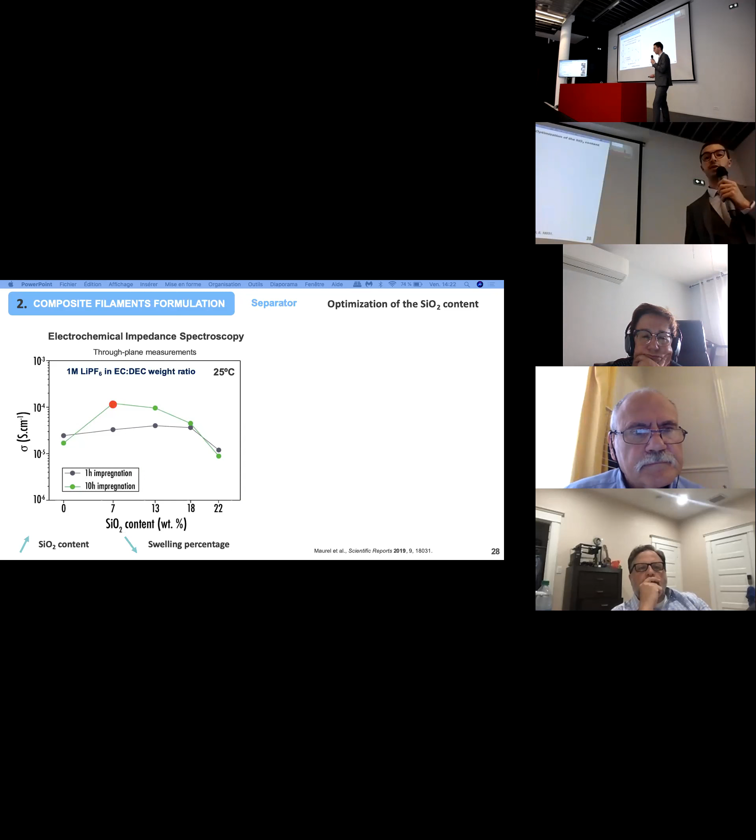You can see a red dot appearing in this graph, corresponding, after 10 hours of impregnation within the liquid electrolyte, to an optimized value. This optimized value corresponds to 7% silica content.

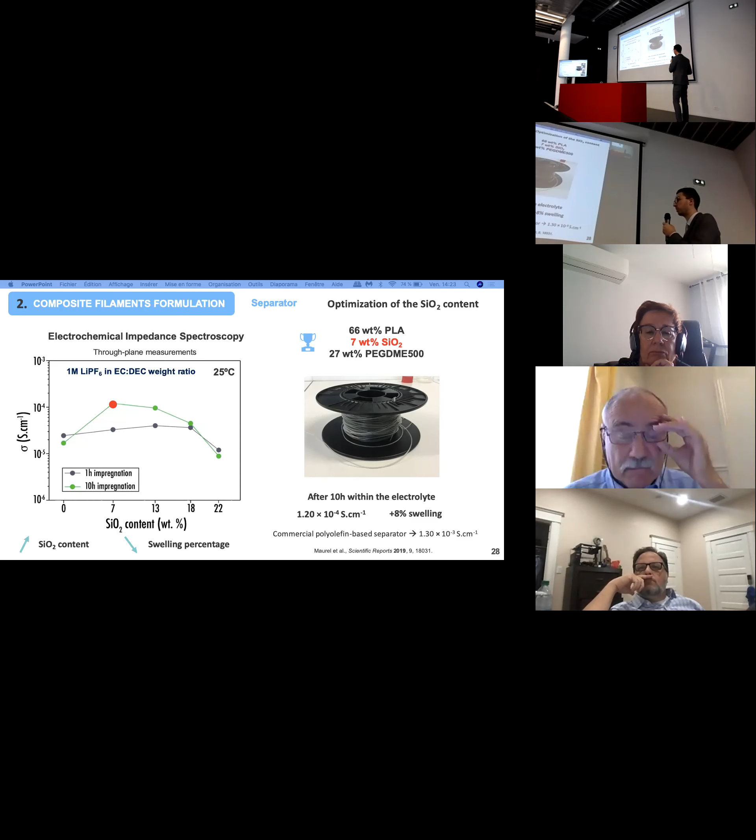So then we produced filaments with this particular composition, and you can see that after 10 hours within the electrolyte, we obtain an ionic conductivity value of about 1.2 times 10 to the minus 4 Siemens per centimeter, which is quite promising, but still far from a porous polyolefin-based separator, which shows 10 times higher values.

So to summarize this part, we developed 3 different filaments: for the negative electrode, for the positive electrode, and for the separator. Now that we have developed these 3 filaments, we can start considering the 3D printing of a complete lithium-ion battery. This is actually the next part.

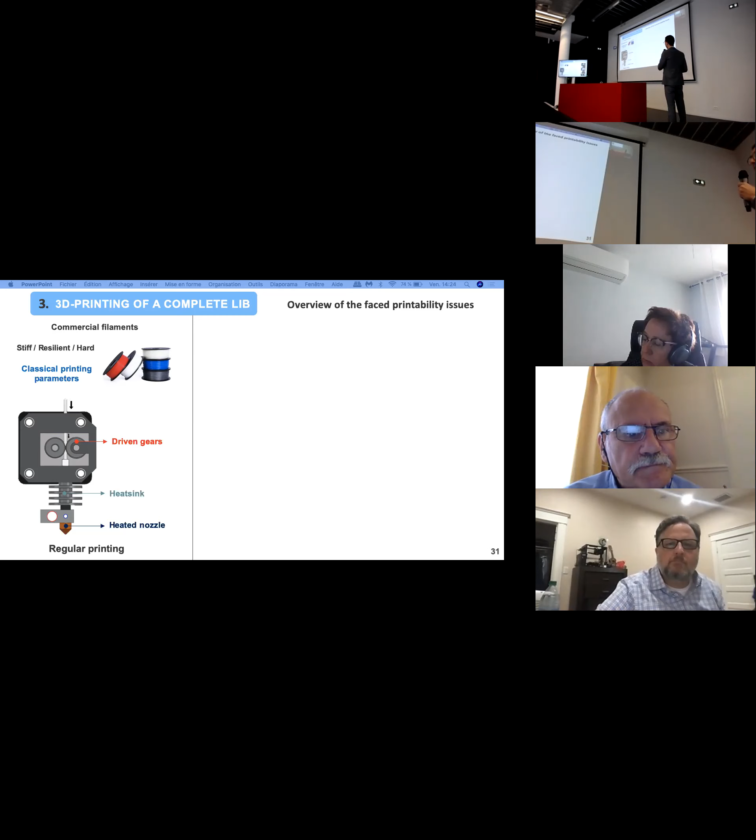Before trying to print the complete lithium-ion battery, you still need to overcome some printability issues. In comparison with commercial filaments that are really easy to print because they are really hard like steel, here you can use classical printing parameters.

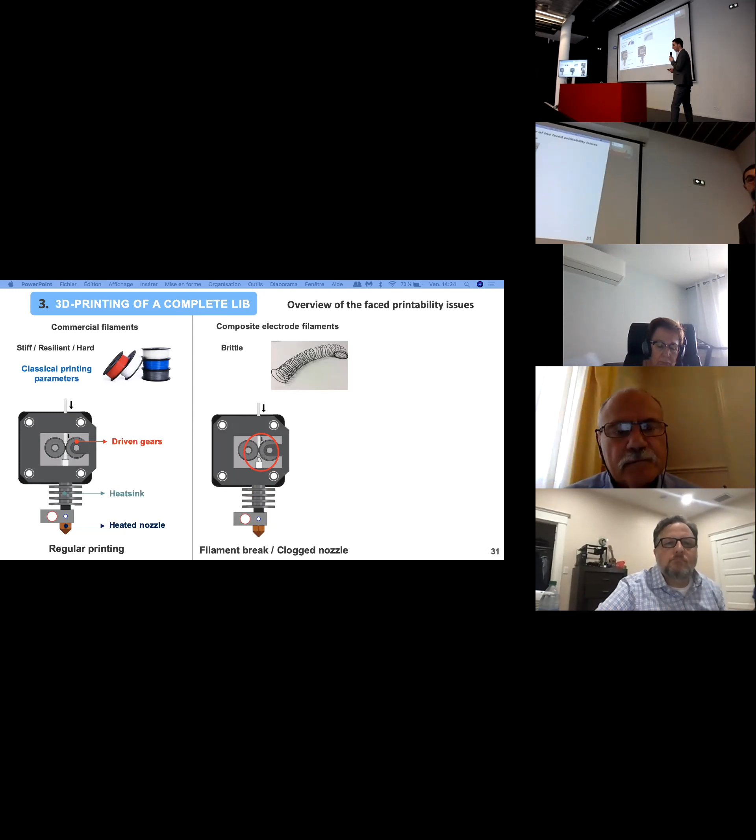If you take a look at the composite electrode filaments that we developed, they are clearly very brittle due to the very high amount of active material in charge. This induces filament breaks within the driving gear, and also some clogging within the nozzle. This clogging and these filament breaks induce extrusion issues, meaning that right from the start or in the middle of the print, you will have no material coming out of your nozzle, which is quite a problematic issue.

In order to fix this issue, we needed to perform some tuning of the printing parameters, such as printing temperature or printing speed. In the future, you can even imagine making printer modifications.

Regarding the separator filaments developed in this thesis, this one was quite flexible, not brittle. So we got another phenomenon called filament buckling. Within the driving gears, the filament has a tendency to come out of the driving gears, which again leads to exactly the same extrusion issues, right from the start or in the middle of the print, where you have no material coming out of your nozzle.

So here again, in order to be able to print this particular filament, you need to make some printing parameter tuning or implement some modifications to the 3D printer. Once, and only once, you are able to finally print those three filaments, both electrodes and the separator, then you can consider printing the whole lithium-ion battery.

From the optimized filament composition, we developed first a 3D printed disc for the positive electrode, the same for the negative electrode, and one for the separator. It's important to mention that the three components were printed separately.